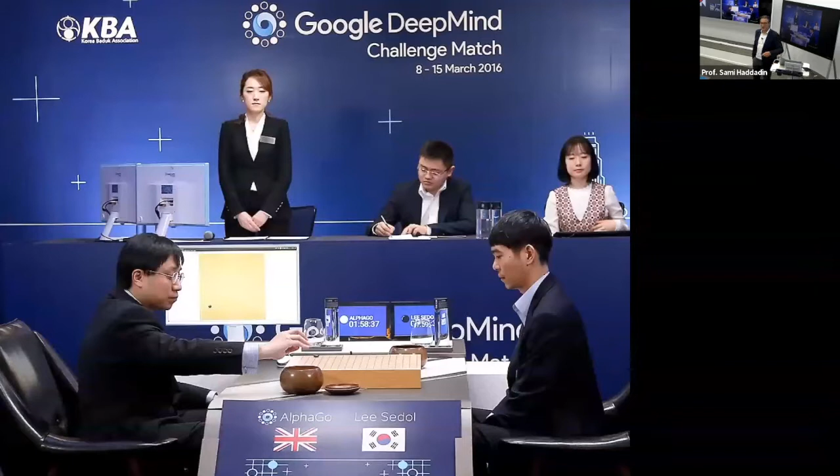And I think I would like to start with a little bit of an anecdote, because I think it kind of explains quite nicely where AI and robotics are kind of recently and what happened. And we all know that in the AI field, there have been kind of tremendous impacts. There have been very famous experiments. And many of you obviously know that Google's DeepMind system was beating Lee Sedol in 2016, in the game of Go.

So one could see that the computational efforts that were done were tremendous. That's one part, but also the result was outstanding. So in fact, the AI was beating Lee Sedol quite significantly. However, if you look at the system, and if you look at it from a not pure software-driven perspective, but from a robotics perspective, you ultimately need to ask yourself one question. Who the hell is the person on the left side?

If on the right side there is sitting Lee Sedol, and in the background the AI is telling the moves, then this - and we all agree this is not a robot yet - so this has to be a human. So the physical action of executing the AI commands in the real physical world still needed to be done by a human.

And interestingly, when this came out and I saw it as a roboticist, I thought, oh wait, this is actually something that I've seen many years ago when I was still in high school. So in high school, this was the big revolution. This was the other big AI revolution 20 years before, where IBM's Deep Blue beat Garry Kasparov, the world-famous chess player, nowadays more politician. And interestingly, the same question you could ask, except for the person sitting on the other side of the table. So on the right side, there is a person. He's one of the main developers of the system, but also the same question.

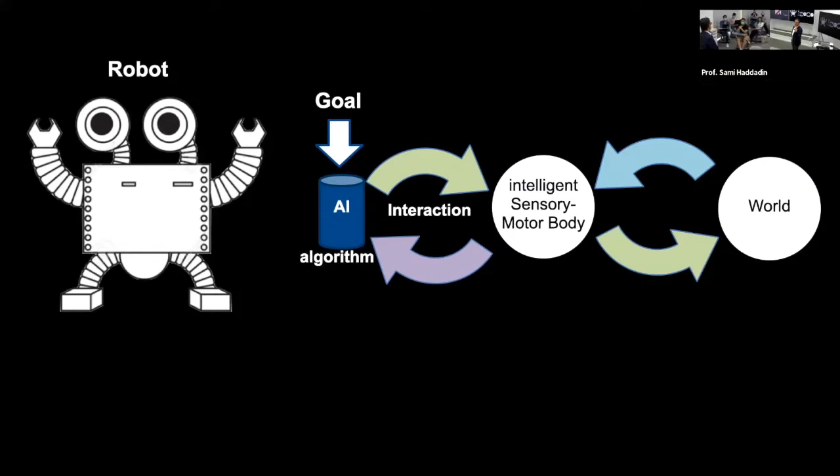It's not a choice. It's not like speech, where you can at least to some extent decouple the source and the sink. It's a systemic process, and this has to be reflected in robotics.

And then obviously the skills that we want to give the systems are not just in one domain—they are reflected in various dimensions, typically represented by the functionality, the goal, and the algorithm. And obviously we need to take care about the energy problem and the memory problem. We cannot have infinite resources. Let them be even quite substantial, but they still need to reflect the constraints of physics.

Meaning, if you want to have a mobile robot, if you want to move in the real world, if you want to have an autonomous car, we all know the energy problem is one of the most important ones. And it's not just the energy supply, but also the energy consumption of algorithms, as all of you are obviously aware of. And then the actual skills we typically care about in robotics are locomotion, manipulation, and interaction.

Manipulation and locomotion are also interaction problems in nature, but interaction with a human needs very distinct approaches. It's not the same as walking, where we interact with the ground or the environment, or manipulation, where we typically interact with passive objects that have physical properties. With humans, we interact with other agents, or robot-to-robot communication—another form of interaction.

So we have one big challenge in robotics all over the world: we are kind of doomed to be told that robots steal the workforce, that they steal jobs. That has been a prejudice for many, many years. And even if you talk about AI, all the magazine covers typically show robots that take the jobs—it's never a binary code or something, it's always this physical manifestation.

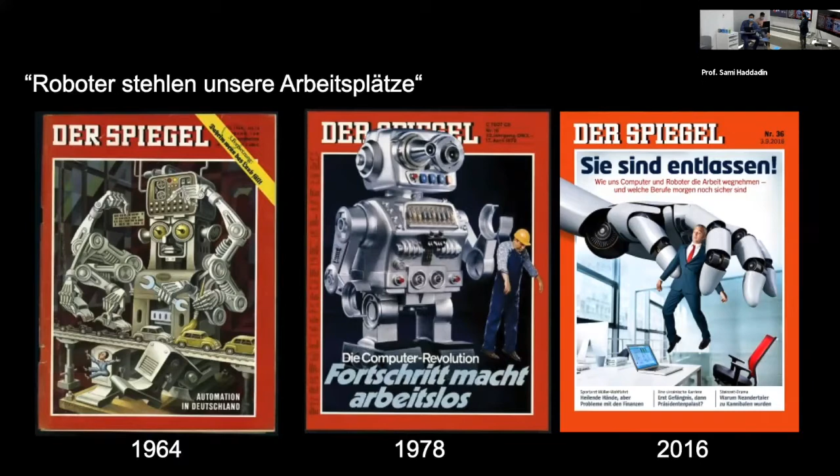This is, in Germany, a very famous newspaper—like our Newsweek, you could say—Der Spiegel. In '64, '78, and 2016, they always made this narrative that robots will steal the jobs. Implicitly, on the left side, it reads automation.

So the rise of automation after the war in Germany was obviously very important. And then the computer revolution in '78 - you think about it, retrospectively you're not really sure how to respond to these kinds of statements. And 2016: computers are taking away the jobs.

But interestingly, just about 4 weeks ago, there's another important newspaper in Germany - I know there's many of these in the world, I just showed them because Germany is very conservative. We need to think first, then we move, then we think more, then we move a bit more, and so on. We think everything through from the beginning, and only then, if we're 100% sure it makes sense, we start moving.

Why? Because we have labor shortage, high risk jobs, demographic change. These are all massive challenges that our societies are facing all over the globe. I think society is at least starting to understand that automation, robotics, intelligent smart machines that use AI algorithms are part of the answer.

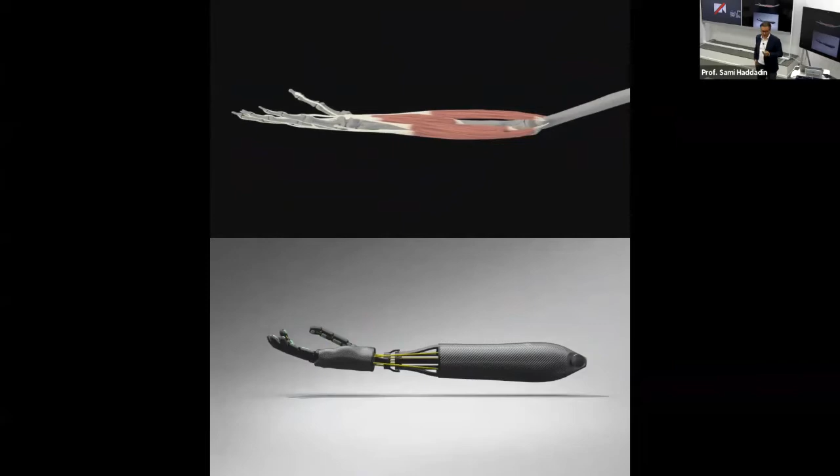Okay, then obviously one important aspect is the intelligence in the body. Sometimes we call this embodied intelligence, the emergence of what we know to be the homunculus, so the representation of the human brain regarding how much volume of my brain, of the cortex, is responsible for parts of the human functionalities. Obviously, the sense of touch, the manipulation, is by far the biggest ones.

And this is exactly what we have been bringing into robotics. So robots with an artificial nervous system, with an artificial sense of touch, and making sense out of interaction. So it seems that in human intelligence, the interaction with the world is one of the core things to understand before we can actually generate true intelligence, because it's something that has to be exploring the world, to interact with the world and make sense out of this world.

So this kind of relates to the picture I gave you on the systemic interactions between the sensory motor body, the AI algorithm behind, which is basically the central nervous system, you could call an artificial central nervous system, and then the interaction with the world. So, and then obviously the body schema. I was talking about this earlier.

That's something we all know from little kids, especially when infants, they start to do these motor babbling skills, right? So this comes basically for free. And this leads to a kind of an optimization process in our own body. And we have been reproducing these kind of things in AI fashion, you could say, that our robots are basically able to be switched on. They move around a little bit. They explore their own topology, generate that automatically, and it doesn't have to be done manually anymore.

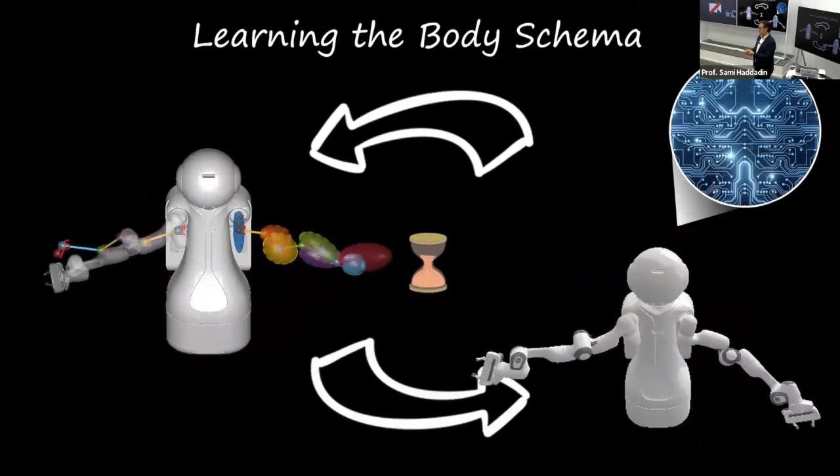So these kind of approaches give artificial embodied systems the ability to automatically generate intelligence on a, let's say, body level. And that would be the basis, because these things are really important. If you don't know what you are, where you are, how you interact with the world, it's very hard to do this purposefully. I would even argue it's impossible.

Then you start to get these locomotion skills. Interestingly, one of my students has parents that filmed all of his steps when he started walking. So they have all these kinds of motions, so we could study a little bit how he was doing. Seems to be normal, he's walking quite fine. And from this, obviously, come the principles of locomotion. This is the only thing I'm going to talk about locomotion today, but just so you know that this is obviously a very important aspect in robotics.

Locomotion is a highly dynamic process. Many of you know Boston Dynamics, right? So many of these things are in some form still pure control. They're understanding fundamentals of the body, but they're still missing the intelligence, the autonomy, the learning, and so on. But still, it's very hard to do these things without understanding physical principles. So that's an important aspect, that you fuse physical principles and learning principles together to really build physically embodied AI systems.

One of the key skills in humans, that's where we are today. That's my daughter when she was 4, trying to open a door, and I gave her 10 trials and she did it in 7. So that's kind of the key skills we have. We're not yet at the super complex thing. It took about 1 minute.

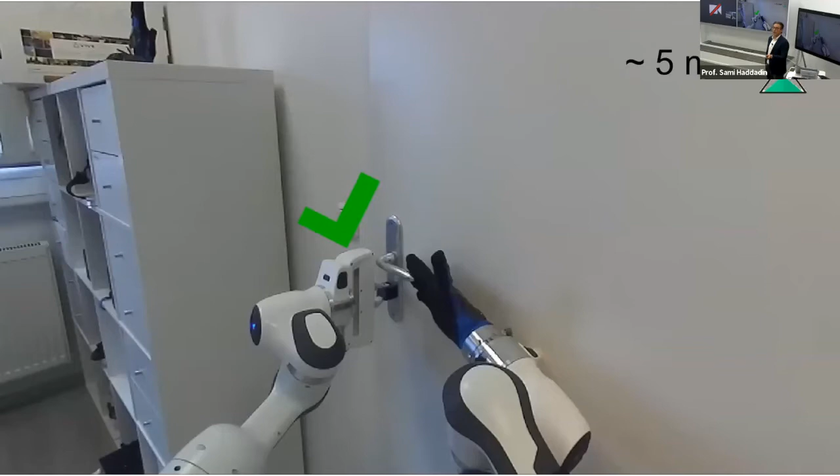Then obviously the fusion of various sensor modalities. We need to not only have proprioception, the notion of where am I, how do I interact, but the fusion with visual skills, auditory skills, and so on. Multimodality in reality is absolutely important. It's very interesting if you look at humans, how bad they perform if you reduce one of their senses for some time. They need to compensate, they need to learn. It's a fully new learning cycle that you implement there.

These kind of things are really important. How do you fuse visual and proprioceptive information, tactile perception, so visuotactile loops, such that you can really have human level performance, in particular in interacting with unknown environments that you have not seen before. This generalization is extremely important because we simply cannot generate all the data that has never been there. So robots need to learn in the loop, and therefore reinforcement learning is one of the preferred choices when you look at these systems.

But this is just a very recent advancement. So let's look at what happened in 2015. Let's take a step back. That's exactly what happened in 2015. I did an experiment with my daughter.

She was making a big mess in our living room, and I was wondering about the learning algorithm, so I told her: if you take this key and you can open the door in less than 10 trials, you don't have to clean up. So I set the reward, right? It's an interesting way to do experiments—I've got 3 kids, so I do all kinds of experiments with them. What was happening was that within 10 trials she was successful—it was 7, in fact. So I was wondering, maybe it's 1, maybe she will not be able to do it.

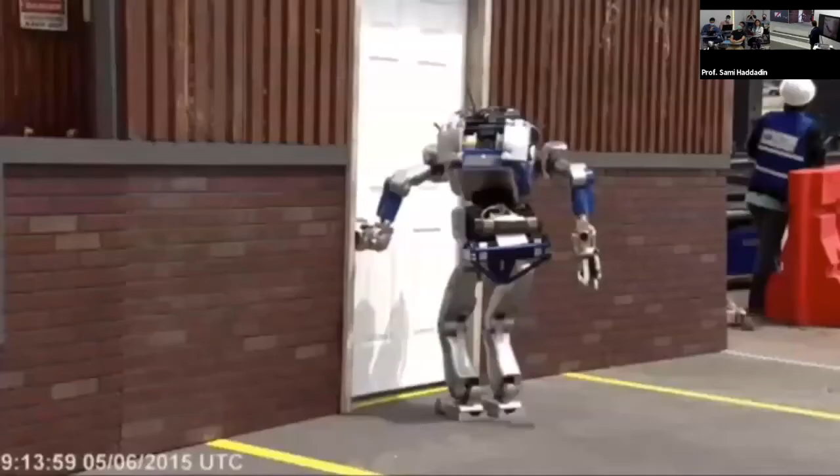This was the time where big data, machine learning, deep learning was really taking off, and in the robotics field that was not happening. Somehow it's kind of devastating, right? We were not there, not even close. The best groups in the world were competing in 2015 in the Robotics Challenge, and let's face it, we were not even close to where my 4-year-old kid was back then. Let alone the Garry Kasparov of key opening. So that's a very different challenge we had there.

All right, and then if you look at it, why is it so hard? Why was, for example, the advancement in mobility so much faster?

Autonomous driving seems to be there to some extent. Well, in fact, if you look at biological systems, mobility has been there very early. Every single cell organism is able to do navigation, to do mobility. Very simple, right? It seems to be evolutionary, one of the earliest concepts.

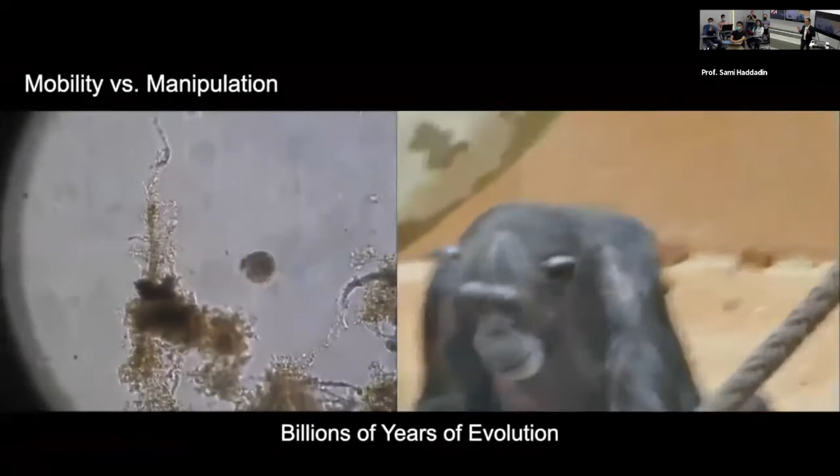But if you look at manipulation, primates are the ones that really could do it. This took billions of years of evolution, co-evolution of brain and body. So there seems to be something fundamentally more complex in manipulation and interaction in the physical world than purely navigating around it. So I think this is just an example that tries to understand that.

And interestingly, this has always been a question in robotics. Even if you go back to the early days of robotics, it started with very big positioning machines. That's the first industrial robot by Joe Engelberger and George Devol. That has actually been the first robot that industrially was able to be combined with a computer. It was the Puma 560, which is still the grandfather of every first generation industrial robot, the first computer controlled robot. A 6 degrees of freedom, 6-axis motion that could be controlled by a computer program. So this is kind of how things started.

But at the same time, essentially, the early days of tactility already took place. No one ever wanted to have just a motion robot. Everybody always wanted to have, I mean, Shaky was a mobile robot, but anyone else who did manipulation was questioning, was asking the question: can we interact with the world? Can we grasp the world? How do we introduce tactility? The sense of touch is the most important sense in physical reality to produce intelligence.

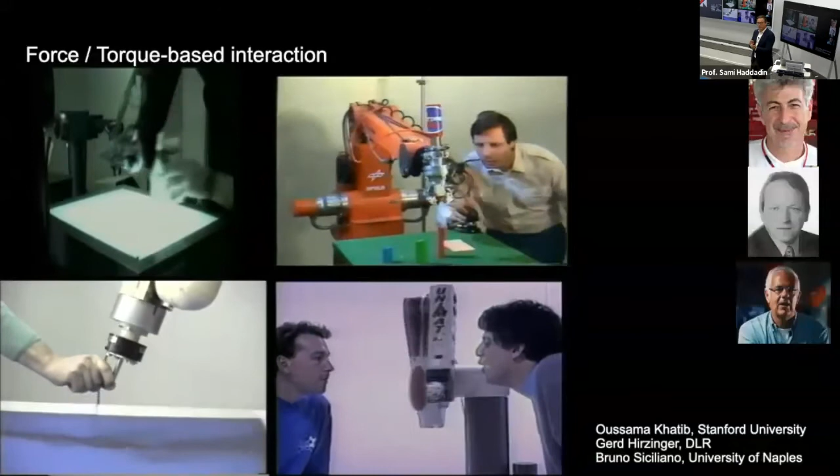So this was not new. In the early 80s, many famous people like Oussama Khatib or Gerd Hirzinger, Bruno Siciliano, and others were doing the very, very early basics. How can we make robots force sensitive? How can we make them reactive? For example, reactive planning based on computer vision. So this was always very early on already in robotics, but it never hit the reality. It was never punching through to translate into real industrial or real healthcare robots or anything like that. It was always in this laboratory environment.

So the industrial robotics generation has been the first one. As I said, the Puma 560 was the father of all the standard industrial robots, and you can have here hundreds and thousands of different systems. And then only maybe 15, 18 years ago, the first so-called cobots came into the world. Robots that could be operated with humans without safety fences. They had a kind of an emergency system, or still have, that if you touch them, then they stop. But it's really a very crude system still.

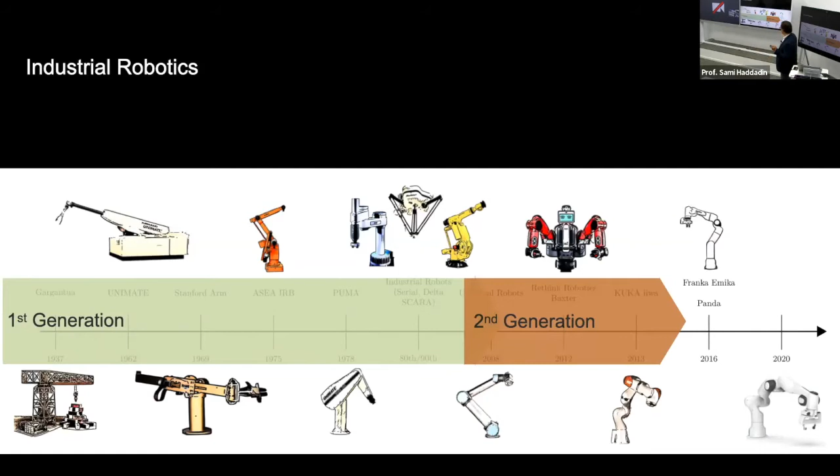And then only recently, for the first time, we have systems, and we were kind of at the core of this development and also translation to reality. So these systems are now industrially available. They are considered the 3rd generation of robots. Also made it to the cover of New York Times, National Geographic, and so on, which I think was nice to appreciate these big breakthroughs, the first robots with a true tactile sense of touch in reality - not only in my lab. And to be honest, it took 15, 18 years of basic research and many people before to do some of the basics, and now we are there that these kind of things can actually be realized.

So, obviously there have been many key influences, and many of them really go back to probably many of the names like Raibert or Khatib or Paul, Hirzinger, Atkeson, Hollerbach. So many of the people also in AI were doing tremendous impact, were originally trying to solve these problems. In the early 80s, actually some of the concepts were proposed in '78 or '79. So this has been always a dream of robotics to have robots in the real world, but we were just technologically not there.

And then there has been lots of work on what we call collision handling. How do you interact with robots? How do you give them reflexes? How do you make robots with flexible elements? We are all flexible, right? There's so much intelligence in the human body just due to our flexibility and compliance. So how do we make use of that?

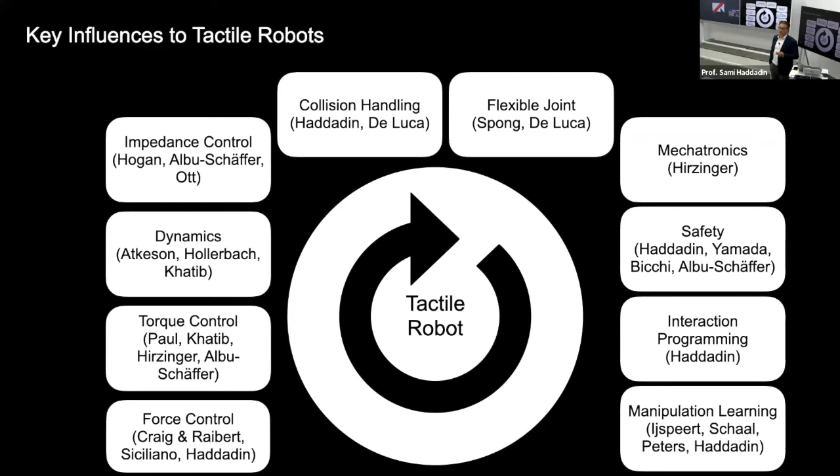And then obviously all the great works that came into manipulation learning from Ijspeert, from Peters, Schaal, and others who have been really seminal in the way that they introduced various concepts into robotics. So these kind of systems became now reality.

Just to give you one example, very anecdotic, but what's the difference? So that's a standard positioning robot, obviously very dangerous, none of you want to be around it. If you look at the collision system of a collaborative robot, it doesn't really have a sense of touch. It's more like a car that runs into something and doesn't kill it, so it's still very brutal in some sense.

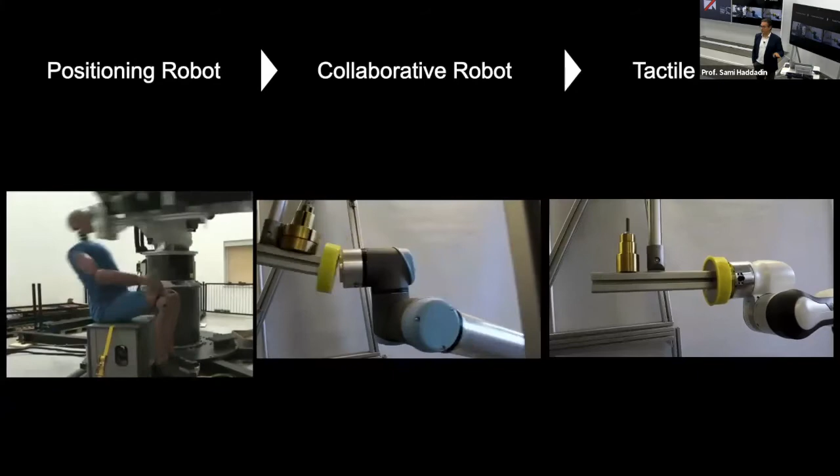And then comes this final generation, really with proprioception and the sense of touch and a reflex system similar to humans. By the way, the reflexes you need to touch the hot plate and retract are about 60 milliseconds, just the reflex. These systems are now at a millisecond, so 60 times faster than a human. So that's true superhuman skills that finally could be reached.

And how is this possible? How do we get to this tactile performance, and then how do we exploit it in algorithms? Because this will open up all the things like in deep learning, the difference between GPUs and CPUs, and the ideas of essentially new algorithms that enable that.

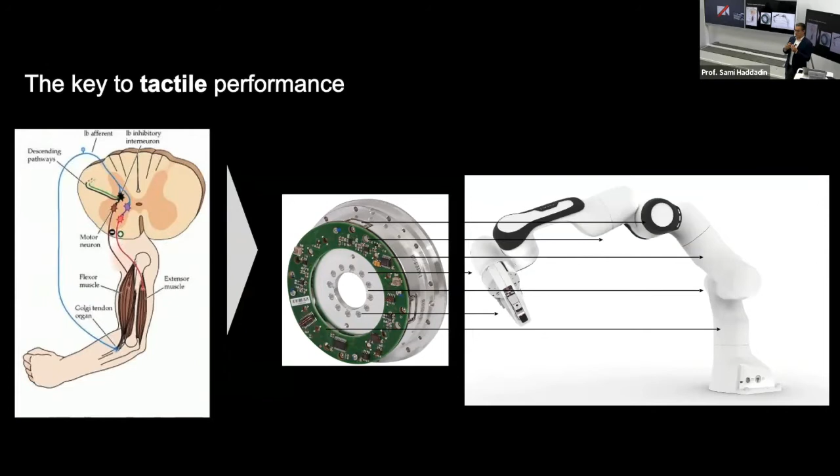So the tactile performance comes from mimicking what we have in the muscle systems. We have the Golgi tendon organ, which is essentially a force sensing device, so we are able to measure our internal forces. That's built in all of you. This is basically what we copy with technology, and then put a lot of control and learning algorithms on top. And with this single sensor, like when you have a computer vision sensor, point clouds enabled everything in perception.

So these two kind of analogies are drawn: GPUs and point cloud sensors. So we have now sensing and the right hardware. So dynamics models, interaction control, reflexes, machine learning for manipulation, and tactile programming became possible.

So what do you get? You have robots that weigh 17 kilograms, and with intelligent algorithms that are aware of their own embodiment, you can take these robots by the hand like a little kid. So now you can show them stuff very easily, very gently. This is the true first robots that are tactile in nature.

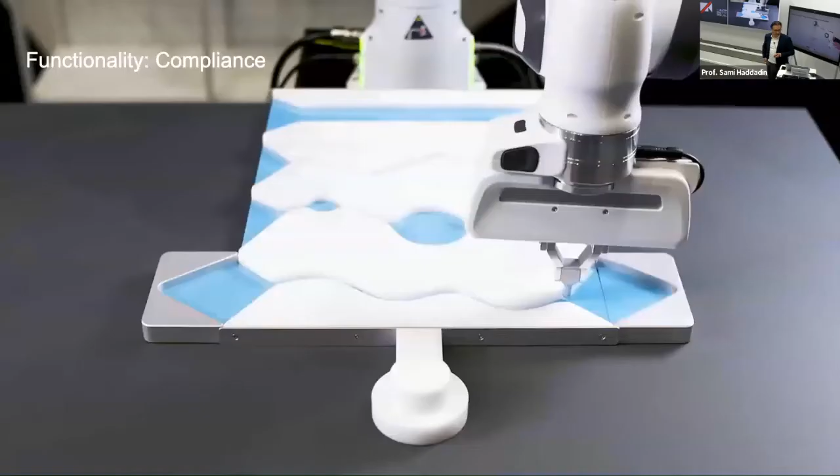And they are compliant, so they basically have artificial muscles all implemented in software. These robots don't know what curvature is there, and they just give in because of their compliance. It's active compliance, really kind of an artificial muscle system.

And you can actually change the environment online, and the robot still is able to follow without any algorithms that need to plan. So it's pure built-in intelligence, similar to what we humans do. We can follow curves and lines very naively, very intuitively, because we are built like that. It's kind of built into the system.

So it's in robustness and intelligence that gives us the ability to respond to the uncertainties of reality. This is a fundamental principle that is built into any biological system that has to interact in the real world.

And then safety reflexes. So a robot that can fulfill Asimov's famous law of not hurting humans, that's how you do it - that's a nail. The robot is blind, it's pure tactile, and it contacts the balloon and responds so quickly that it is not destroying the balloon. That's, I think, the safety system that you want.

Why don't we have autonomous cars yet everywhere on the street? Because safety is still the main problem. But if you want to go to reality, you have to make sure that humans are not hurt. So this should be our main priority in AI systems in general: do not hurt, do not harm, a little bit like the oath that medical doctors take.

And obviously what is really important is intelligence on the levels that you don't see. They're so fast, in milliseconds, that you want to detect collisions, contacts with environment, which is the manipulation problem, from the early phases: to detect, to classify - detect the contact, where is it, what kind of signature does it have, what's the purpose of the contact, is it a collision, is it a potentially harmful contact, am I manipulating the environment, am I handshaking - and then reacting to it. This is a very fundamental aspect. And if you want to be able to do that, you need to be able to fundamentally detect contacts in arbitrary environments.

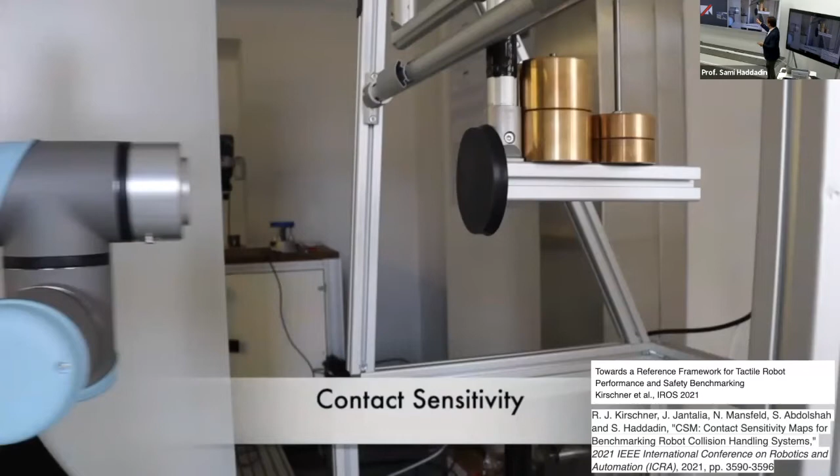This is an experiment showing that a step change in robotics has taken place. Collaborative level systems are essentially not able to detect contact with, I don't know, maybe 10 kilograms. I think none of you have this kind of low sensitivity, so all of you can detect very light contacts, right?

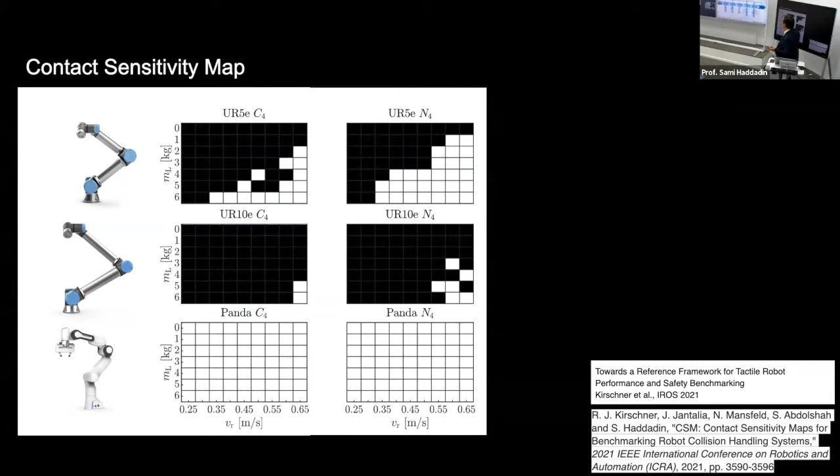All right, and what can we do with that? There's so much we can do with it. Obviously, we can now respond to an environment, we can respond to humans, so we can actually show different reaction strategies. Robots can now do all kinds of things, and they move in proximity to humans. You can basically talk to them via haptic interfacing.

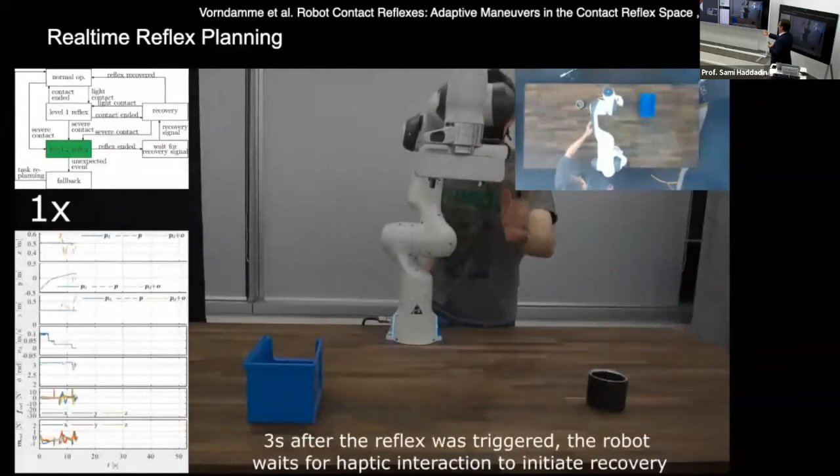Depending on how you touch them, they speak a different language, so they go faster or slower. You can show that reflex, they go back into the task. They do all this autonomous planning, just in milliseconds, because they know essentially what the task is. The task is to get that cup here. And if you see the collision during the phase where the cup was not in the gripper, the robot was compliant along all axes.

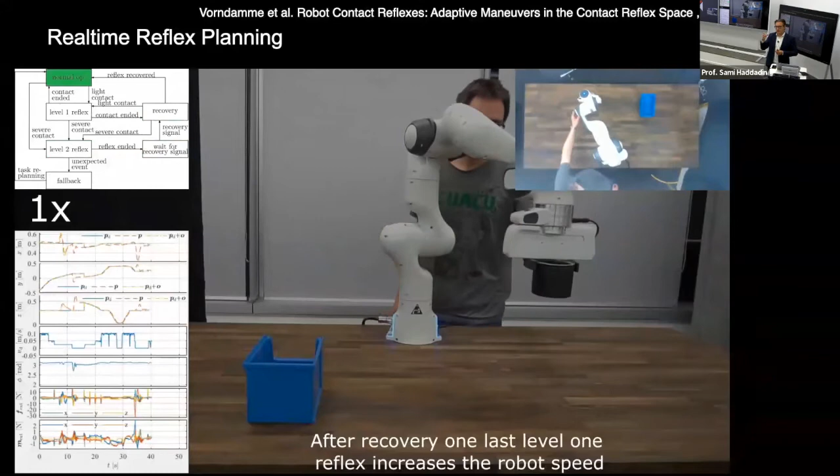Now it's obviously aware of the object it's carrying, so if you take it away out of the task, it holds the cup. Imagine it's not spilling water, right? So the idea is that this intelligence in the system, this embodiment, has to be in the AI of the system, and it needs to understand what the task is and be able to respond to that. These kind of low-level reflexes are actually on a level that humans cannot do. We are basically trained over a long time, but we cannot plan, let alone have them be dictated by AI algorithms or by intelligence itself.

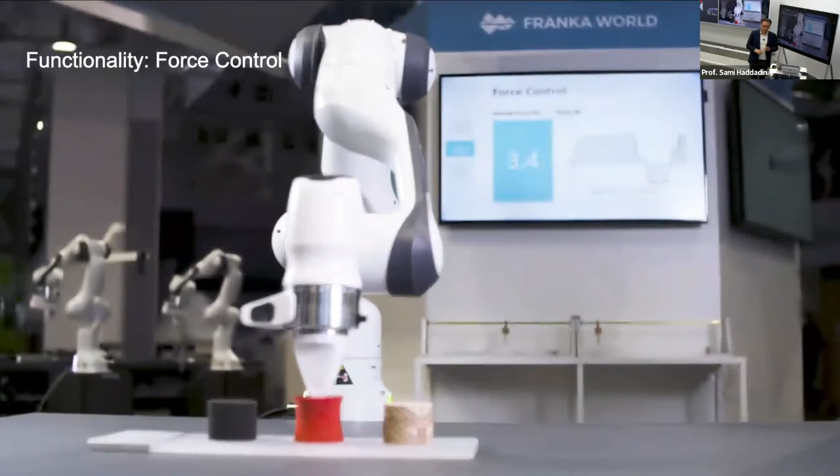And then obviously we need to control the world, we need to be able to control forces. So if I tell the robot 7.8 newtons, regardless of the interaction, this is a very principled experiment. Whether it's foam, whether it's rubber, or whether it's wood, it has to be 7.8 newtons. This is something that, by the way, you guys cannot do. No human is able to exactly control that force.

It's actually something that now makes these machines safer than humans can ever be, which I think is an important aspect. So with these robots, you can actually have tactility and interaction abilities that, with the right algorithms, can now be safer than anything we've done with humans. This is our GPU, you could say, in robotics, right? So now we finally have robots that have this tactility, that have these interfaces, and you can now do robots that can do things that for you are very simple.

But if you look at the reality, no robot has ever polished a car. No one has ever done the famous trick from Karate Kid. So these kind of things can now be done. By the way, the robot has no idea it's a jigsaw, it does not know that there is this impact, so it just tries to polish.

With these disturbances in the environment, that's basically the robustness of these algorithms you get. They can actually deal with totally unknown aspects of the environment. The robot does not know how long this object is. Just by feeling and low-level AI planning, it's able to respond to these kind of unforeseen environments in millisecond decisions. On the left side, you see the table is basically moved by a human all the time, and the robot is replanning on the spot, while very accurately applying force to the environment.

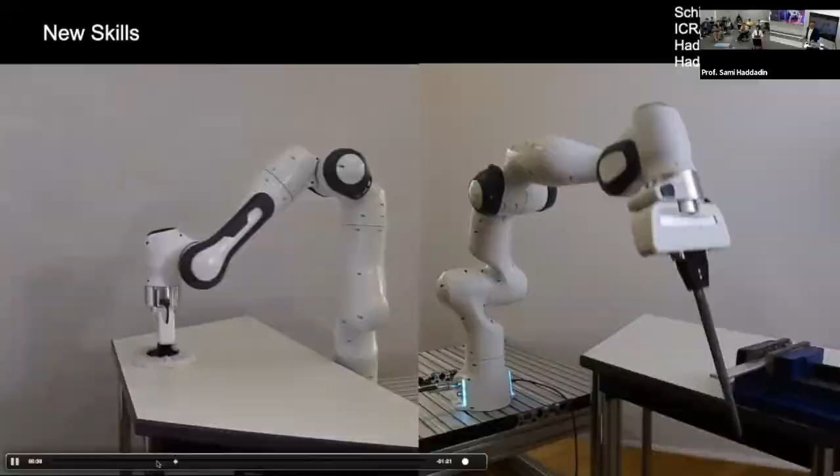So this is really now where we are, basically, standard. What is this good for? It's, for example, good to draw Elon Musk from the distance. That's something the robot here has its sense of touch. The artist on that side sits and uses that robot as an avatar, right?

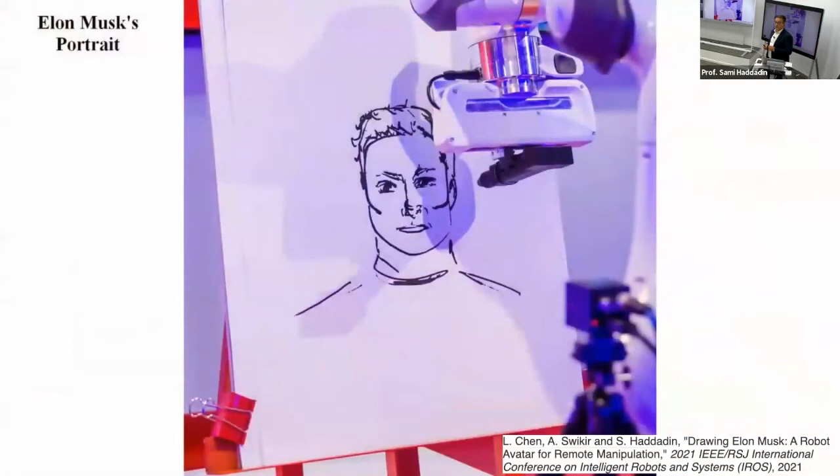It sees only that visual representation, and the robot is basically the prolonged arm, but obviously via a distance. So the robot is basically managing all the low-level things to, in the end, have such accurate drawings without being on site, without being physically connected.

So it's really kind of this intelligence, low-level intelligence, tactility, and control that gives you that kind of authority on remote interaction, which obviously in the pandemic would have been great to have everywhere available, right? I mean, think about telemedical applications, for example.

Okay, so what can you do with it? Well, you can now automate all the things that could not be automated. So you can automate electronics. Electronics is basically done manually still today. If you think about our wonderful digital devices, they are done in massive manual labor all over the world, right? This is something that is not automated. Millions of people do very, very uncool jobs to essentially manufacture these devices. And in particular, why is this the case? Well, because you know how easy it is to break the glass of an iPhone or other smartphones. So this kind of automation is now finally possible.

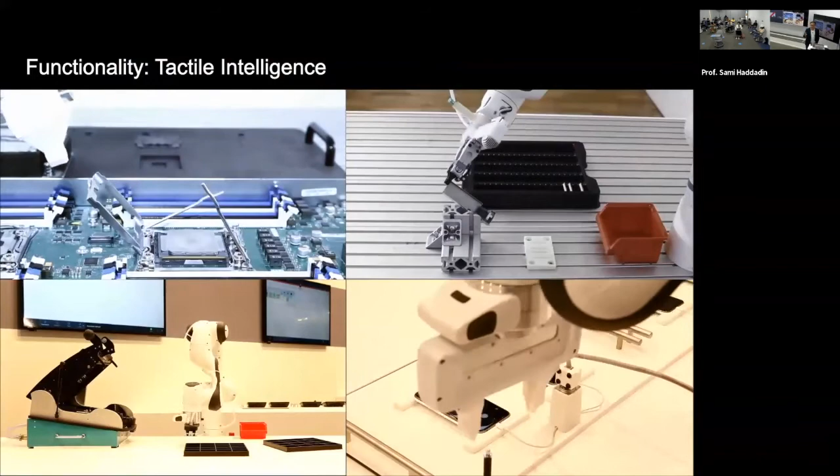And what is kind of interesting, so I also founded a company called Franka Emika. It's Germany's robot manufacturer nowadays. And these systems have now basically been deployed anywhere in the world. Every big company, every lab in the world that does manipulation research, or most of them, are actually using that system, including NVIDIA in the Omniverse. You see it being used in Intrinsic. So these kind of systems are now enabling all the machine learning communities in the world in robotics.

So this is really now the hardware we needed. And I think what is really great, it's not only in research, but also all the technology drivers in the world are now understanding this. If you look at ICRA, which is the biggest robotics conference in the world, out of maybe 120, 130 manipulation research papers, 100 of them now use that robot. So it became the de facto standard in the world to basically do your manipulation and manipulation learning research.

So, same thing, just as a final conclusion to that part of the talk. This is now where we are in terms of systems, and then I'm going to talk about how we use that in all kinds of new types of learning applications.

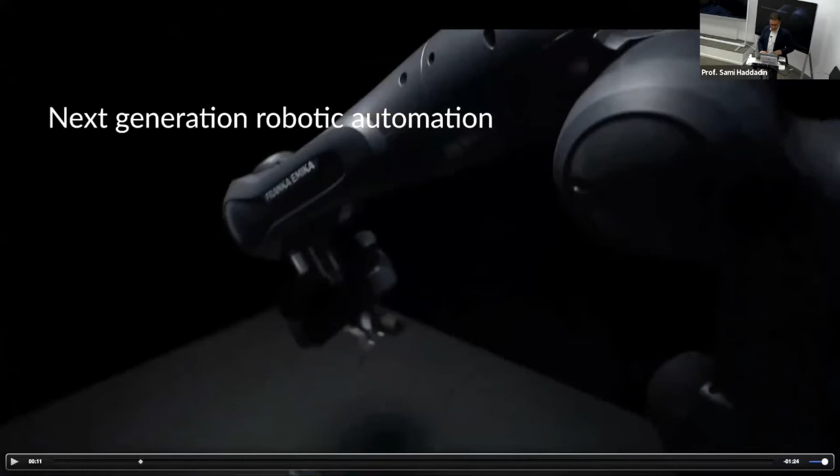And what I'll show you now is a video. There's unfortunately no sound. Do we have sound, by the way? No, there's no sound. Oh wait, no, it's me. Sorry, I think I switched it on and off earlier.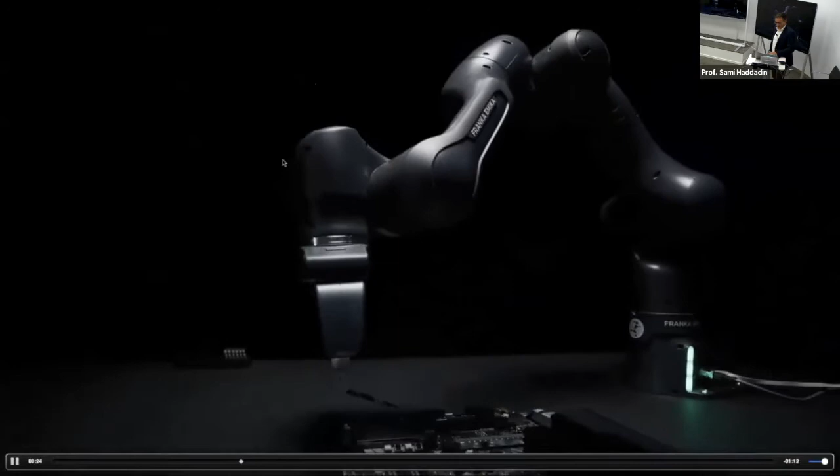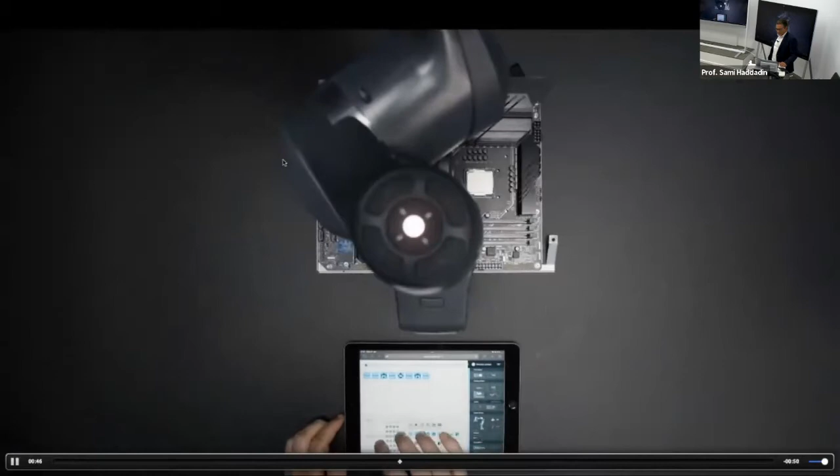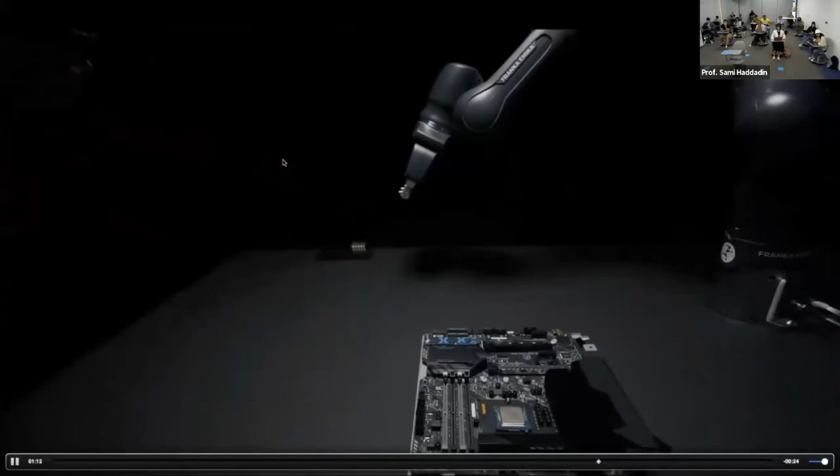Franka Emika pioneered robotics with a human sense of touch and is committed to creating a robotics platform to revolutionize industrial production. Now, introducing Franka Production 3, the robotic automation tool for everyone. In-house designed, industry-leading torque sensors in all 7 axes allow for a large range of motion and poses. Intuitive user interface allows anyone to start using Franka Production 3 in minutes. Just plug and use. Designed to be intuitive, smooth, effortless hand guiding for precise and easy positioning. Compliant with industrial robot safety requirements. With Franka Production 3, we are enabling industrial automation that allows production of anything, even a movie. Franka Production 3, dedicated to the new generation of industry players. Think it, make it.

Okay, so basically this has now become reality, which I think is great, that this becomes available to people. And now I'm going to show you how this can be used for all kinds of machine learning research. So it's kind of our GPU in robotics, right? I've said this now already several times.

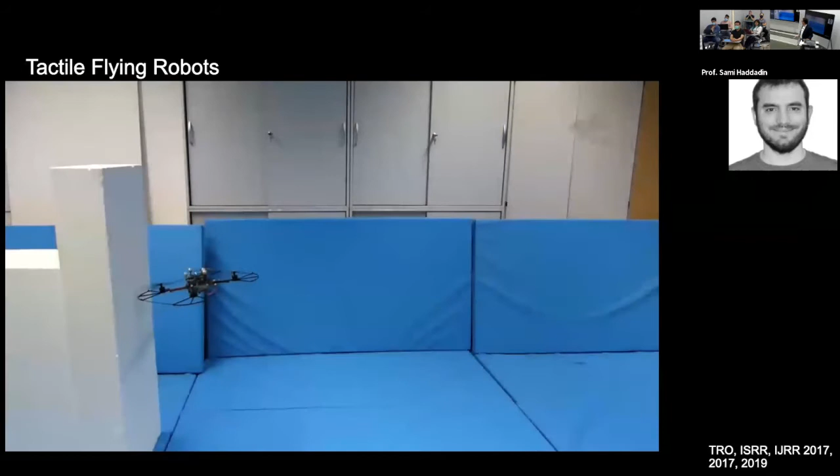So it's really important to understand that hardware accelerates software. I always wanted to do lots of things in manipulation learning, but somehow there was no platform yet, so we basically needed to create it. And that's kind of now the solution. Interestingly, just as a side note, this is not only enabling manipulators, but also, if you look at it, Theo was actually my first PhD student many years ago. So what Theo has been doing in his time was, okay, let's crash a drone—can we enable drones also to do the same thing as we just saw?

Okay, so drones with a sense of touch. Why? Because this gives drones the ability to fly around, and if they are autonomous and fly in the woods or whatever, they don't crash into stuff and stop—they just bump into it and can continue.

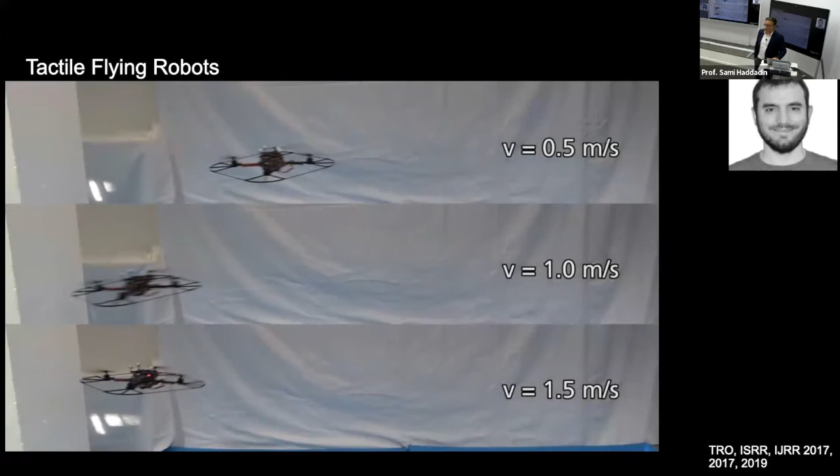This has been commercialized as well with, maybe some of you know it, Skydio, a US-based company. You can use it not only for bumping into stuff, but also for landing and taking off during very strong winds. What you see here is the drone autonomously estimating the wind at the moment based on these senses of touch, and is able to autonomously land despite this heavy wind.

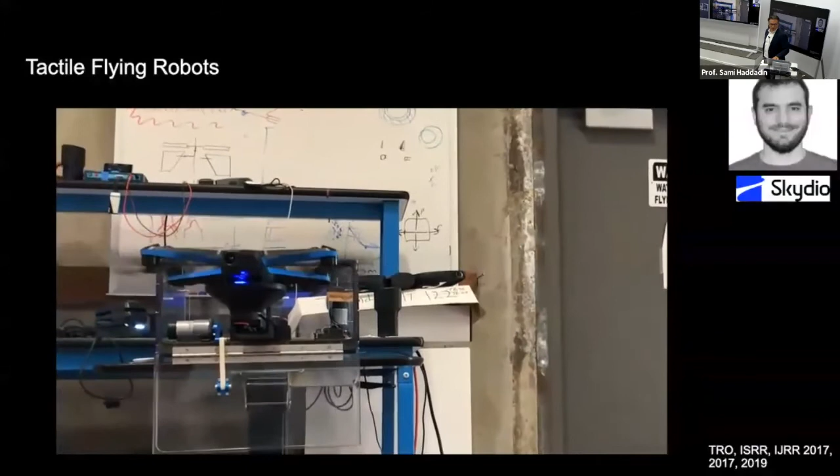Not only for drones, but now also for mobile systems. Mobile systems typically have bumpers, but they don't have a sense of touch. If you think about autonomous cars, I told you they may crash into stuff, so you try to minimize the danger. But what happens if cars, autonomous robots, essentially have a sense of touch?

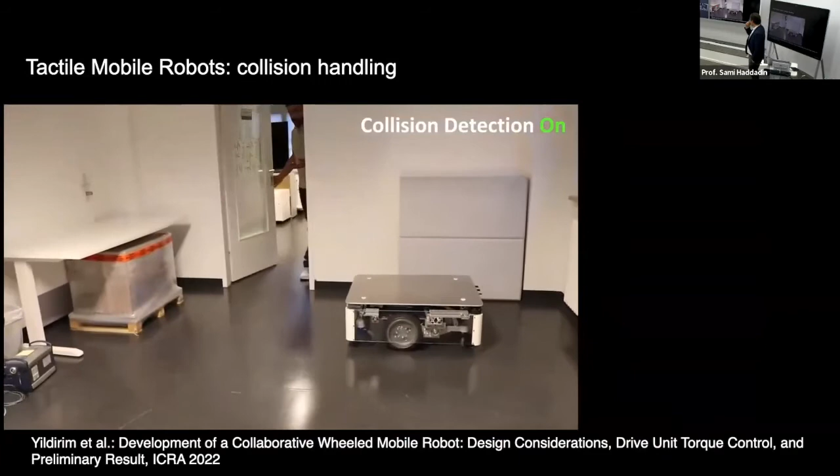So basically the same thing, the sense of touch in the drivetrain—we just published this at ICRA—is able to very sensitively detect the contact. This is a 100-kilogram platform that has the sensitivity of, I don't know, of your hand basically.

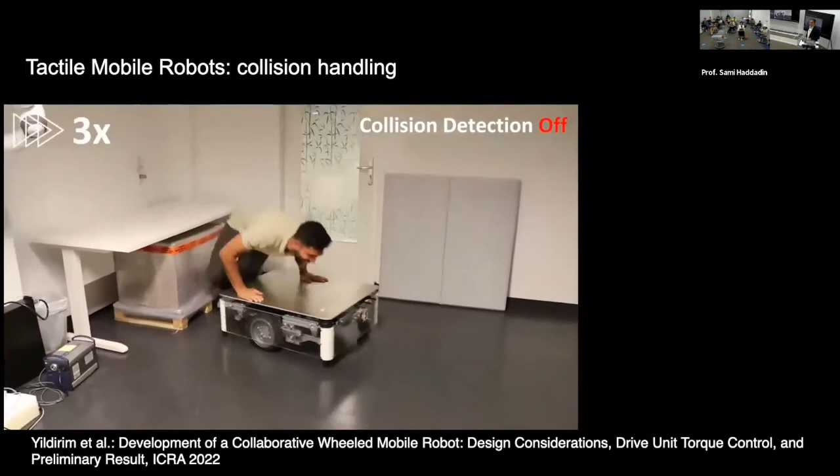You can obviously switch it off, right? So it's a software thing. But it's always nice to tease the developers with this. I think it's clear that this kind of technology is very, very crucial. If you want robots in the homes, robots in the healthcare sector, how do you want to do this if you cannot do safe interaction with the world?

That's absolutely crucial. And then last but not least, we actually solved this problem, I think, for general robots. This is multiple contacts, slow-mo, and the robots are able to detect, isolate, and estimate all these contacts at the same time. We can do this for fully-fledged humanoids, even at millisecond, faster-than-millisecond ranges. So now you have basically extremely fast, beyond human capabilities, to detect and react to collisions in principle.

One thing that now has to come as the next breakthrough is obviously interaction via tactile skins. That's something that is still not yet there as you would like to have it. So there needs to be something done.

Interestingly, this can not only be done for robots, but also for prosthetics. So other things we're doing at the moment is to generalize these things to hybrid systems, to symbiotic systems that basically share human interaction—essentially prostheses that have a sense of the embodiment, a sense of touch, and a sense of awareness of the body picture. This obviously relates very much to what we call nowadays digital twins.

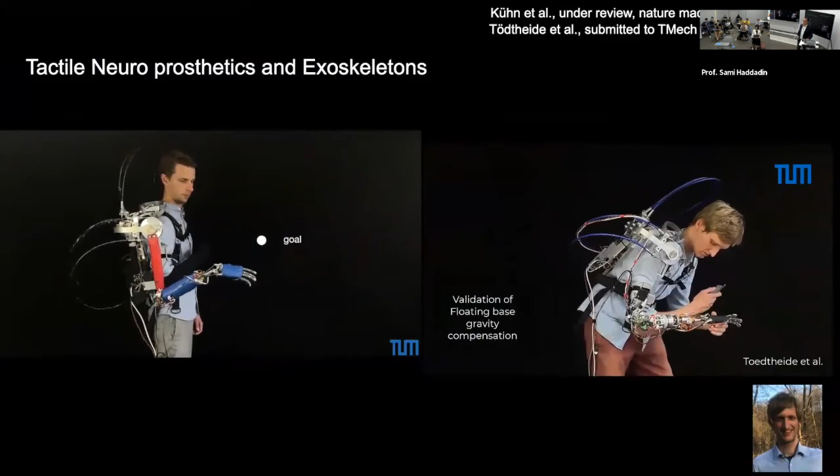Just to show you one example, that's the last thing on the embodiment part. So you see that the systems we build, despite being floating base, don't know—actually they know—that they are connected to the human, and they estimate based on available sensor information the state of the human, in order to be a perfect substitute for the, in principle, gone capabilities. These kinds of ideas are essentially such that any kind of system now—prosthetics, flying—we do it now for underwater systems even.

So can we make them aware of interaction, aware of their embodiment and interaction with the world? This kind of basic body awareness is fundamental to any really intelligent system.

All right, now let's come to the actual learning. So with these kinds of embodiments, can we replicate what my daughter was doing back then in the 7th trial? What you see now is basically the 7th trial when she was successful—a very interesting way of grasping things, but this obviously gets improved.

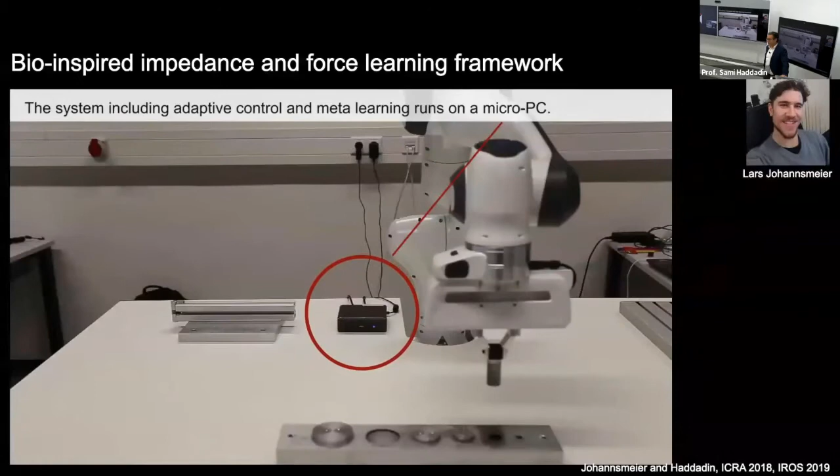We've been doing this for many years now with colleagues also from Imperial College—Etienne Burdet—trying to fuse human-inspired motor control and machine learning approaches in very efficient, very small packages with robots that can do these very hard manipulation tasks, not in days and with huge computing resources, but just on a standard PC and just in a matter of minutes.

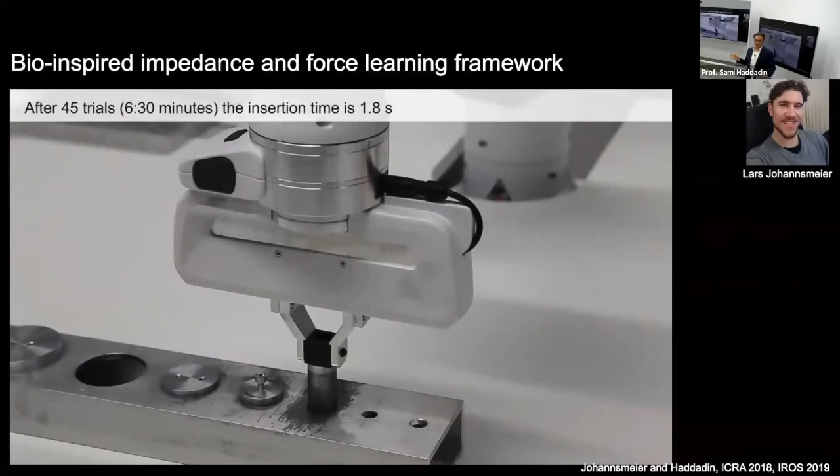So the idea is essentially to bridge the data lag problem with smart, let's say, reinforcement-based learning approaches that build on a control stack that is highly human-inspired. With this, in just a matter of 6 minutes, you can learn something that kids need 4 years and the 7 trials I was talking about before. So this is kind of the speed-up we have gained. And interestingly, if you compare that to standard deep RL methods, which are end-to-end, I will show you the results.

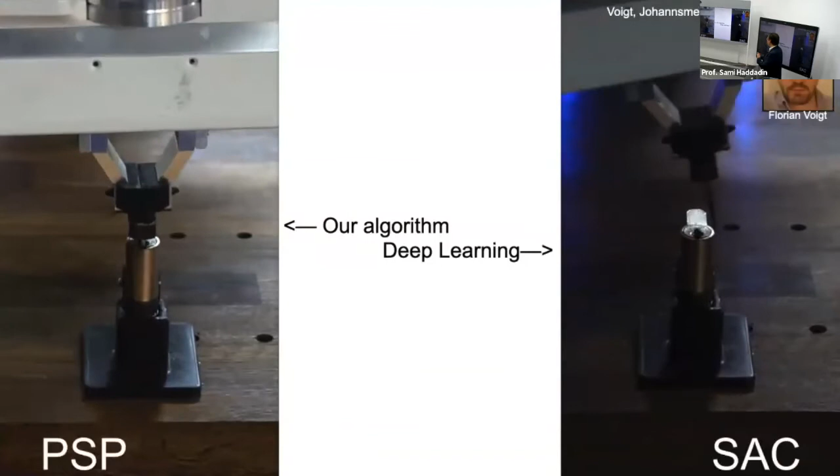In contrast to human-inspired architecture with a learning loop built on top, you can actually see for yourself the result. On the left side is something we published maybe two years ago, our algorithm, and on the right side is really uninformed end-to-end learning. It's essentially impossible to solve these highly complex manipulation problems without any physical or prior knowledge in the sense of intelligence, because it becomes intractable. We did our best for weeks to find a solution, but standard end-to-end was not able. With model-informed machine learning approaches, you can bridge that gap and achieve the breakthrough of robots solving manipulation and insertion problems in reasonable time with small packages of compute.

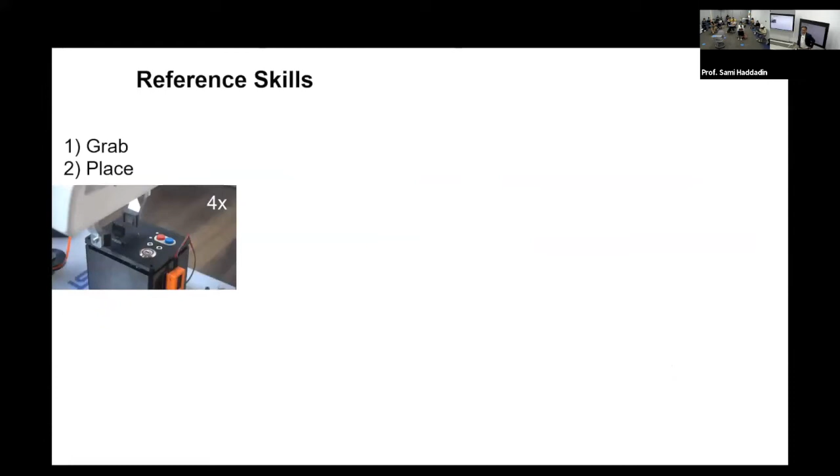If you do that, you can reach a level comparable to a human. What we did, which I think will be published at IROS, is compare this to a human expert programming the same thing - he's using the robot, programming it, and on the left side is the AI. Obviously the human expert is much faster at programming the system, and learning took a little more time. But what's interesting, beyond it being an expert, is the outcome: the execution speed of the learned skills - pushing buttons, inserting, and so on - is exactly the same. So the performance of the expert programmer is equal to the output of the robot learning algorithm, which I think is kind of remarkable.

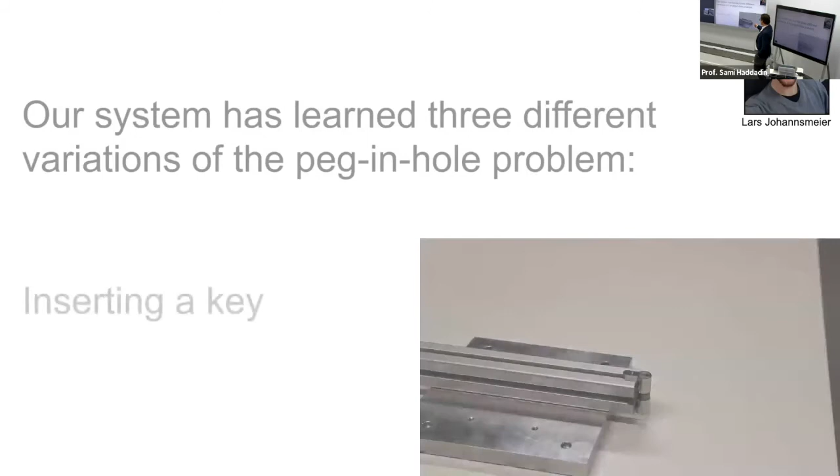The interesting thing is it can learn not just one task, but many tasks - so generalization and incremental learning is possible. We can now insert a puzzle piece or a key. These are the three things we want to show - very different tasks, not similar at all, including peg into the hole. Geometrically they're different, contact mechanics is different, compliance is different, accuracy is different.

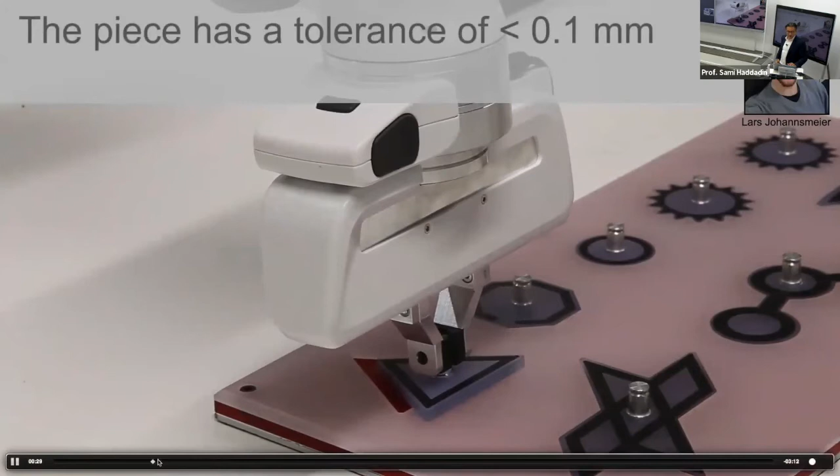And now the first trial of learning the puzzle, you can see here, that's a very, very tight puzzle. It's actually very hard also for humans to do it. And the interesting thing is, I just do it a bit faster. So now the learning is taking place.

Interestingly, we can see that the same learning algorithm with the same parameters is learning all of these tasks at the same time. So interestingly, if you use something from the other ones, it's starting to get faster. So there seems to be a transfer between tasks possible. We didn't expect that, so that's more an observation.

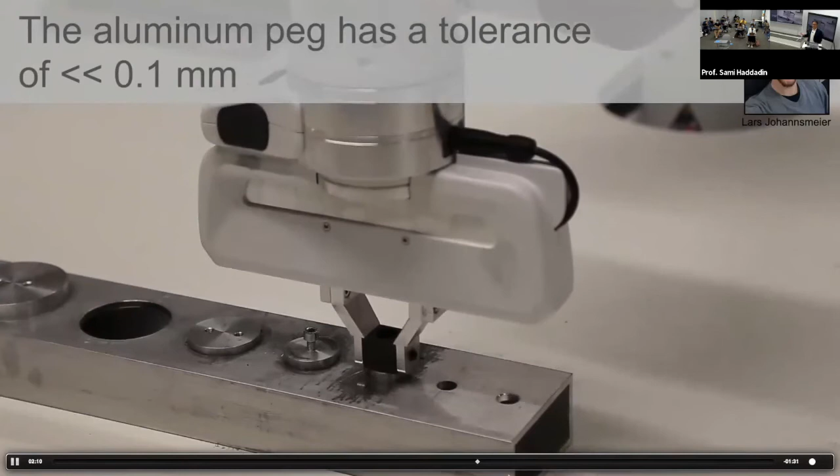So the learning algorithm seems to be now transferring knowledge from one task to the other one that is totally unrelated, you could say, except for it is an insertion task. But insertion is a pretty big word for basically everything we do in putting stuff into another thing. So that's a pretty big step we did there, and it took, as I told you already, 6 minutes 30 for each one of them, and the result now human level performance.

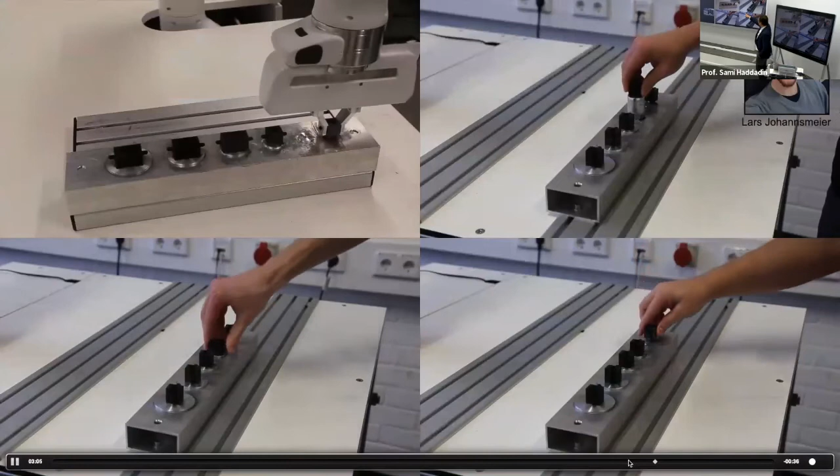So what you see is on the upper left a blind robot just with tactile intelligence, and then that's a mechanical engineer, electrical engineer, and computer scientist. I have to admit, interestingly, the mechanical engineer is the fastest. Kind of an interesting observation in that experiment.

But what is more interesting, I think, is that the robot is actually in the end, and you can see how it's jamming. It's really hard. I did it many times, and I was never as fast as these three. So, interestingly, the robot is in the end the fastest.

Okay, so we are now at human level performance regarding these examples. The next question that I was teasing already is, if we learn one thing, can we transfer it to another skill? Can the robot leverage knowledge it has been acquiring before and generalize so it can even learn faster? Not 6 minutes or half an hour, but maybe it's possible in 1 minute, maybe even faster.

Yeah, and the result, so we kind of classified, this is something currently under submission. We kind of classified tasks into distances, right? So classes of similarity, you could say. So we call these transfers interclass, interskill class, interskill subclass, interskill instance transfer, and so on and so forth. So depending on how close these problems are to each other.

So different keys, they are basically an interskill instance, okay? Or a skill instance if you do the same key at different locations, and so on and so forth. So we need to kind of understand how far are skills from each other, okay? It's a very rough taxonomy that just tries to a priori understand what's going on there.

Okay, and what we see here is just in a nutshell, we can see that depending on the distance of transfer that I just explained to you, you can actually see that the reusing of knowledge, so the speed up, for example, for level 1 transfer is 40%. For level 0 transfer, it's 80%. So yes, you can reuse knowledge entirely. Which means this effect is objectively there.

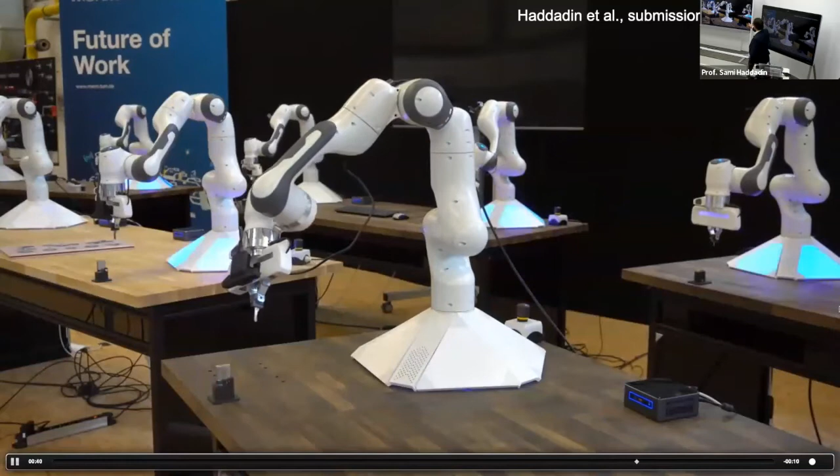Okay, so what you see now is that if we activate, these robots, by the way, have all cameras, as you see, just because we wanted to change the pose. So everything is changed. It's never the same experiment. All of them are different. So it's not depending on the pose. Everything is kind of changing, and they all have different keys. So this is kind of a lock, and you have door keys, you have indoor keys, and so on and so forth. They're all different.

Interestingly, if you look at the digital twin inside, that's the representation of the AI that collects the knowledge. They are, by the way, all distributed. It's not that there is one central AI. They all have these small PCs, and they just send around their learned parameters in a distributed manner, so that's actually fully scalable.

What happens here is you see the green ones are the successful trials, the red ones are the missed trials, and actually the red ones at some point saturate, so they don't go further. At some point, maximum robustness and maximum success could be achieved.

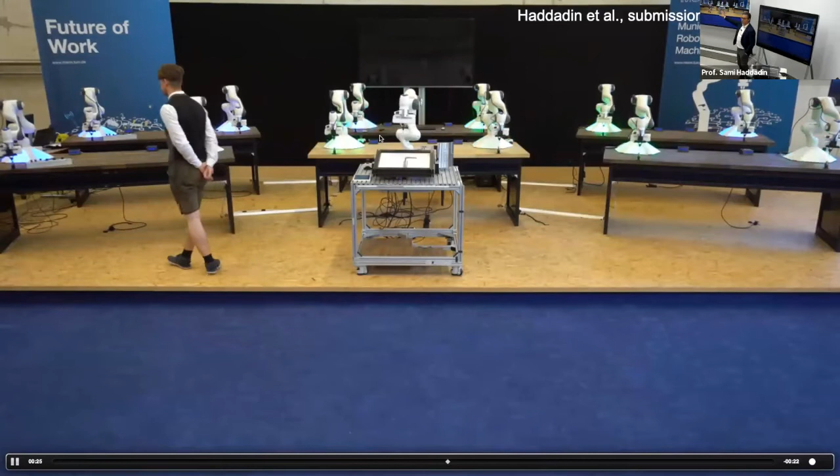This is now what happens in reality, actually real time what you see. The robots, the first one is always negative to begin, then they start immediately to essentially be able to do what they're supposed to do. So very early on, in the second or latest third trial, there's some stochasticity in that process—sometimes it's up to five, but this is very seldom. Very quickly they start to run through the whole network, a kind of an avalanche effect, so they're all able to do their insertion tasks.

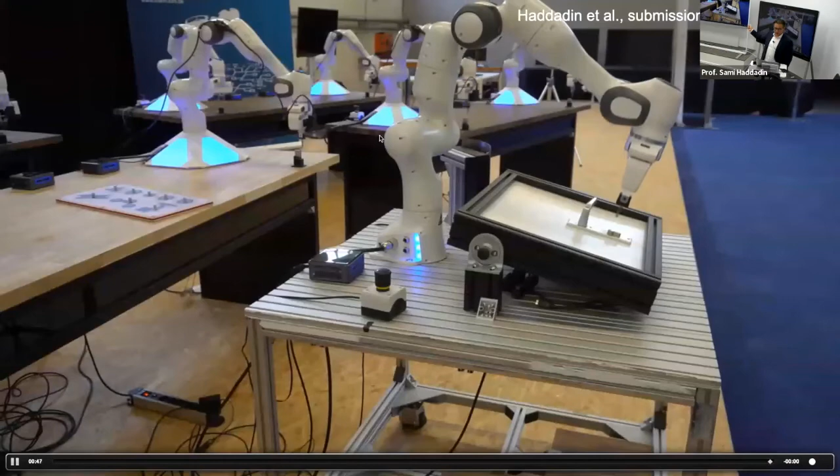And then in the end, we just took, what was this, 20 seconds? And now we put it to the front and you see everything is different—and again, the key goes directly into the hole. That's basically with none of these robots ever having had the key in front, in their hand. So here you can see the acceleration effect, just for one example.

All right, so this is kind of the theory behind it. I will not go into details, but basically, to sum it up, with standard deep learning this is not possible so far, I've not seen it—end-to-end, right? So it's not that deep learning is the problem, it's the end-to-end that is the problem. You need to carefully understand where the end-to-end is taking place. It's not at the torque level, it's at a different level. So if you do that and learn it from scratch, you always need as much time as you need.

If you can learn from experience, so incremental learning, you have the first qualitative increase in speed. And then if you go to collective learning, you get a second learning curve, and this is two exponentials that you see.

All right, so we have come far, I think. It's pretty nice what you can do, but still there's something fundamental missing, I would argue. We have significant problems in acceleration. What I'm trying to say is hardware matters, and we cannot always wait 30 years for new hardware—this is ridiculous. We need to work on the synthesis cycles of hardware to get the same accelerations with the next generation of hardware. This synthesis cycle, the co-evolution of software and hardware, I think has been instrumental in deep learning, and robotics is for the first time also there. So we need to work on that—I think it's clear that we cannot decouple these problems.

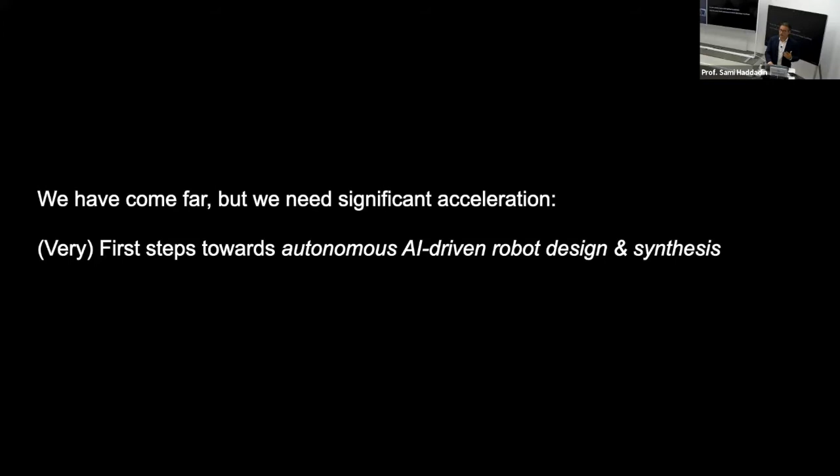All right, so I come back to the cycle I gave you in the beginning, and since I don't have so much time, I still want to go through some of the key results we have here. I want to show you some of these things can already be automated to some extent. Most of them are still today manual, but it starts to become possible that we can automate them.

All right, let's go to the manufacturer—that's actually something that is reality. Since John von Neumann and his universal constructor, the automaton he was proposing, the idea of automatic assembly of artificial systems has been there. It's been one of the main concepts of AI, you could argue, and artificial life, but never really realized, except for some nice simulations that do the game of life—but very few of them really had realism. And interestingly, these ideas have also been around, I think it's 1980, right?

Yeah, that's when I was born, actually.

Back in the 80s already, NASA people were hypothesizing about building robots for space applications. You go to Mars, bring in goods, and then the robots build the robots. That would be ideal, because then you don't have to do everything on Earth. Building infrastructure in remote locations would be fantastic, so robot construction replication could be the answer.

The inventor of the first computer, Konrad Zuse, a German, tried to do the same thing in the late 60s and early 70s, but he abandoned the idea. He was unable to do it, and I think it's very clear why: there were no machines that had a sense of touch.

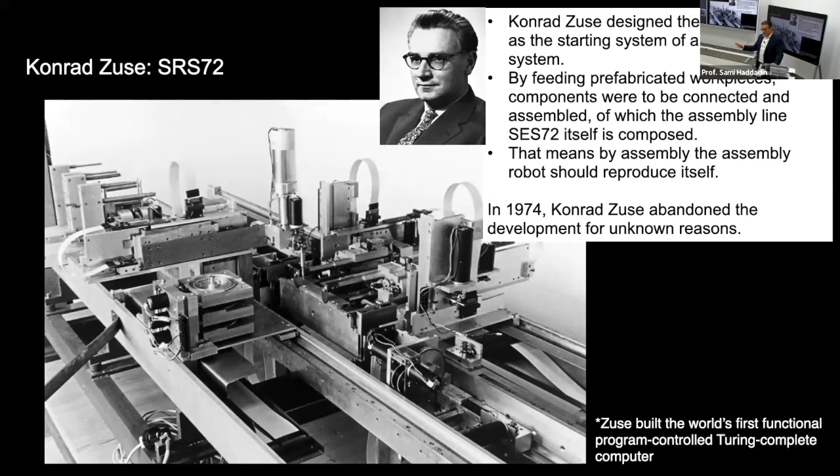If you want to do assembly, that's exactly what this is all about. You need a sense of touch. No sense of touch, no assembly. It's an absolute key ingredient. And this is also why the robots we've been developing work the way they do.

These are some examples we showed at a fair. They're actually assembling themselves, so these robots are the first robots that really manufacture themselves. It's a big factory in Germany where these robots are not made manually by hundreds and thousands of people, but actually produce themselves.

This is why we can actually produce them in Germany, and why they don't have to be produced somewhere else. So these are some impressions from the real factory.

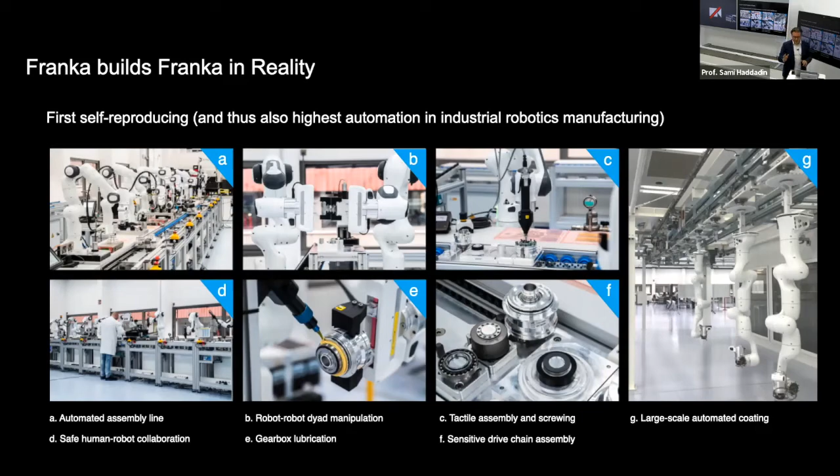Unfortunately I cannot show too much of it, but I think it's clear how this product actually works. You see hundreds of robots, but interestingly, with many humans in between—so it's humans and robots manufacturing robots. This is kind of what is possible here.

Here are some impressions of the tight interaction you see because of the sensitivity and the learning. You can really have robots that basically follow Isaac Asimov's famous first law, according to standards. In particular, you have robots that can do all the delicate assembly processes, learning from the algorithm I just showed you, able to do that in pretty fast time.

Obviously there's still lots of improvement needed until we can automatically produce something from a pure design system, but I think we have done it once, so it exists now—it's in principle possible. Okay, let's go to the design.

What can we automate there? What we're doing at the moment is: can we automatically deduce from human understanding of the hand, design processes of mechanisms in robot hands, and synthesize the design, at least on the mechanism level, such that they are able to do what humans are able to do?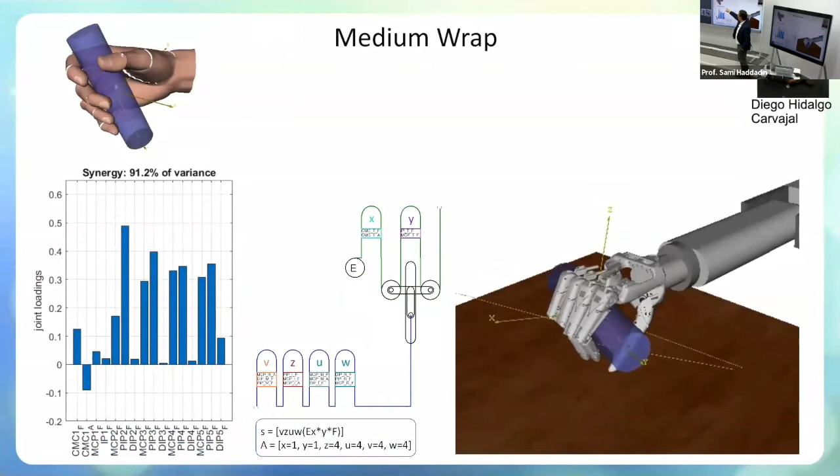It's a closed loop system. We basically use already established principal ideas of mechanics—there are hundreds and thousands of these. It's very hard to enumerate them, but can we use them to learn from what humans have been doing and recombine them to solve real-world manipulation tasks, such as grasping objects, automatically deduced from human understanding of manipulation?

This is a fully synthesized robot hand kinematics and actuation mechanism that is able to grasp all these different objects—so, from object to kinematic design.

Okay, that's now with an end-to-end approach. Similar to the learning I showed you before, we use human engineering knowledge, put it into the networks, and let the network do the rest. So that seems to be something that goes quite far.

You can actually replicate very delicate manipulation of the human with a robotic hand, at least in simulation. This has been done for various tasks and various kinematics. I think this is also to be publicized soon.

Alright, then let's go to interaction—how can we actually learn interaction? This is one of the last parts. Now that I've shown you how we can do interaction in reality, we can use this information to backdrop into simulations.

It's very hard to go from simulation to reality—it's like this typical problem. It's very hard to generalize a special case, but it's much easier to simplify a general solution. The general solution is not the simulation, it's the reality.

So if you know something in reality, then you can simulate it and then you can simplify. That's the way that in robotics turned out to be the right way. So what are we doing?

We're basically using the same algorithm we saw before, but now for hands, to go more dexterous, to inform the next generation of hand development. What kind of things can we do? It's the key into the whole example that we saw before.

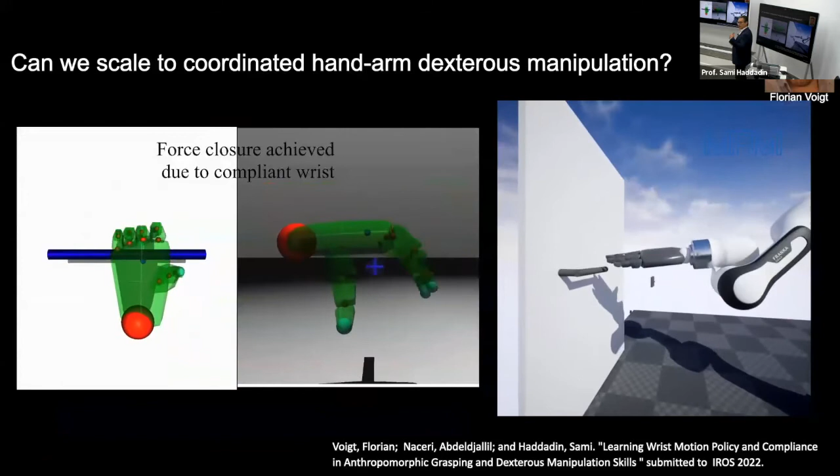This is something that now can be used to pre-train the algorithms. And the next question is, can we actually generalize that such that in reality, a robot could basically learn only in simulation and then do direct manipulation of the world?

So what we see here now is a robot that is learning in simulation, MuJoCo simulators basically, to open door handles. This takes a few minutes, as you saw before, to do the training of the policies. And then interestingly, if you transfer that, that's the real sim-to-real transfer in an instant.

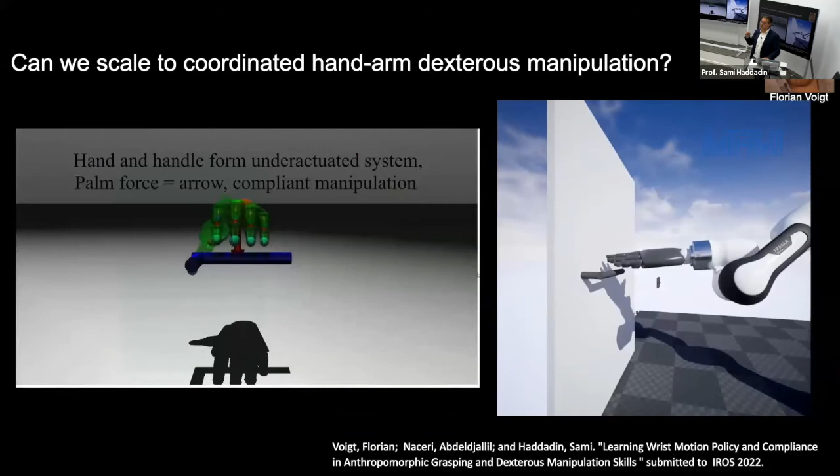So that's the robot that we use for experimental validation. That was just recently. The robot is actually automatically tuning its entire compliance, such that this very big difference you see—that was at least 10 centimeters of difference. It had no idea exactly where it is.

And just by the right compliance, like you do in a hand, you do a door handle opening, you're also able to do that—just naive, intuitively from our learning with interaction. And that was basically just out of the box from the simulator. So I think this really shows the power of AI if you combine reality with simulation and the right embodiment, to really transform these kinds of concepts into reality.

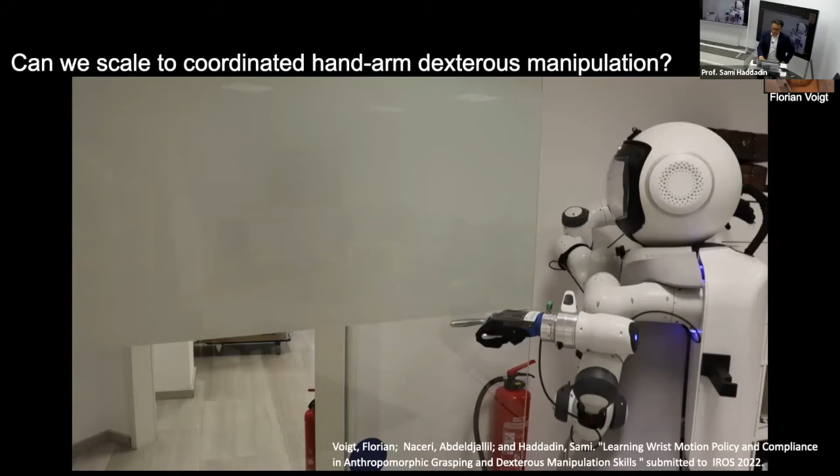All right, then let's go to the body schema. That's the last thing I want to talk about. I have to speed up, unfortunately, but that's one of the most interesting things we came across recently.

Can we basically automate body schema generation? Typically it's a very complex problem—it's highly nonlinear, topological, dynamic, kinematic. It's a mess. To be honest, 90% of robotics research, I have the feeling, was treating the body schema problem, from modeling to understanding to identification.

Basically what it boils down to is that the robot needs to learn a sensory motor graph, the topology—what's the topology of your environment, of your own body, the morphology—and then the dynamics: how heavy I am, how much force I need to actuate myself, and so on and so forth.

So what we did recently is automatically generate the topology of the system by using information-theoretic based machine learning, to essentially try to understand, from the sensory signals we get, can we get the topology of the system? Can we get the connectivity of the different robots?

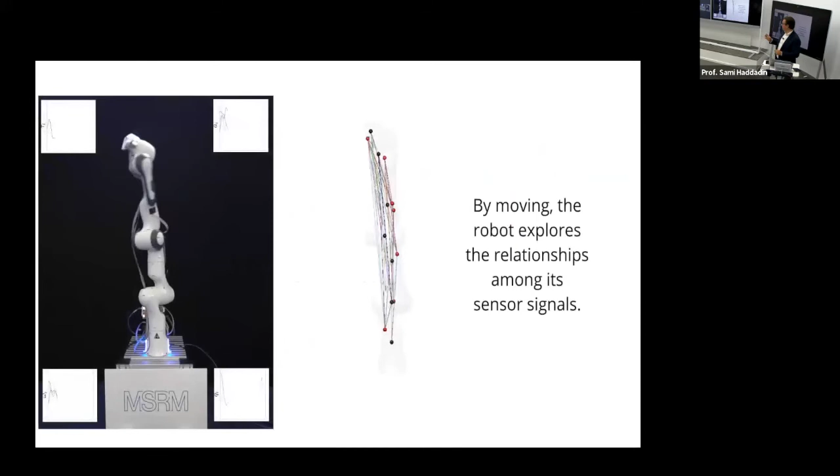So you see on the left, this is just the robot. It has no idea which part is which. It's just measuring the sensory data, and now automatically the robot is, by mutual information analysis, trying to isolate which part of my body is next located to the other one—getting the causal chains, the kinematic chains, automatically.

Obviously, if you build a robot, a mechanical engineer will tell you, why do you do it? Who cares? I gave it to you because I designed the robot. And that's not the point, obviously. The point is, can you generate this kind of embodied intelligence from scratch? And if you have modular robots, new assemblies of robots, and you want this to happen automatically for all combinations of robots in the future, then this obviously needs to be happening automatically.

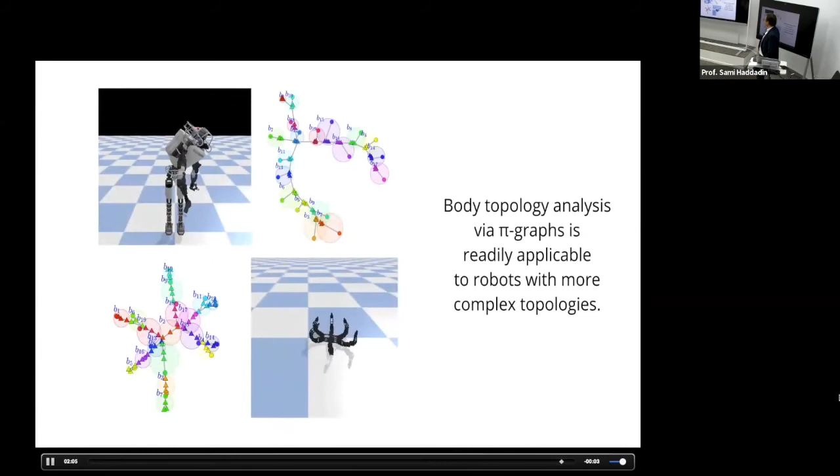So it seems to be quite something. We also tried it with others—I'll just show you some other examples in the end. So with humanoids, it's also working, with crawlers. This seems to be a method that really scales well to quite complex kinematic chains.

If you are not able to understand, at least from a sensory motor perspective, how your body works, how do you want to hold your arm? It's not working, it's not coming from nowhere, so you have to be able to do it. You can machine learn it, but for 7 degrees of freedom robots this will take 130 years just to acquire the data. A very naive and not really great idea to do it.

So we need to have a fusion of models and data acquisition. One thing we did recently is try to get inspired by two great people from robotics, Chris Atkeson and John Hollerbach. They had major papers in robotics, including how to learn dynamics, or how to system identify dynamics, and they found that this highly complex nonlinear equation I showed you can be written down as a linear parameters problem. Wonderful, so we can learn it in principle.

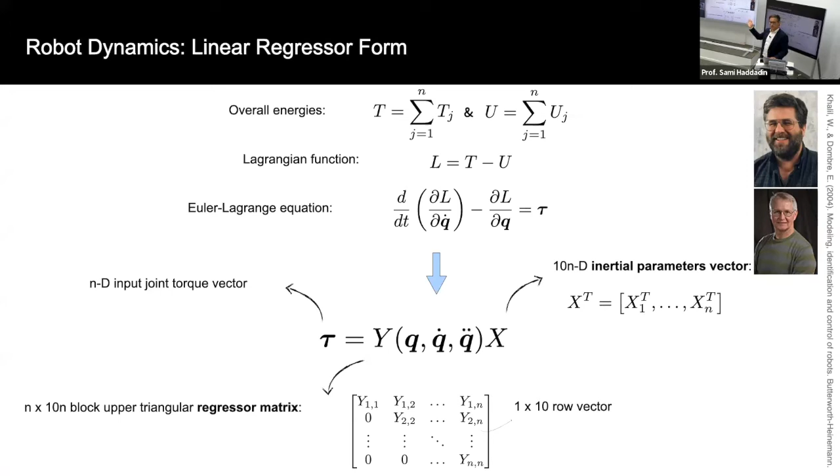System identification does the same thing: build a regressor, do the pseudo inverse, voila, it works. Well, it's a bit more complex than that, but in principle.

So what we did recently is say, okay, can we actually build a network that does the same thing? A new type of neural network, which we call first order principle network, that takes physical principles like Newton's and Euler's laws, combines it with the right acquisition of data, and then builds a network that inherently encodes physics, and is therefore able to capture nonlinear dynamics as accurately as it gets, at least from a numerical standpoint.

So basically we came up with a new representation of this type of dynamical system, not the Lagrangian dynamics or the regressor form, but a network of networks that is basically kinematic: a kinematic network and a dynamic network, sequentially — this is the last part of the phases I showed you before.

If you compare it to standard deep learning or other machine learning approaches that don't use and utilize physics, they basically don't generalize — the errors are between 50 and 100%. These equations are so nonlinear that it's not sufficient to just look at certain bunches, and you cannot just explore the whole space. The equations are not scaling well.

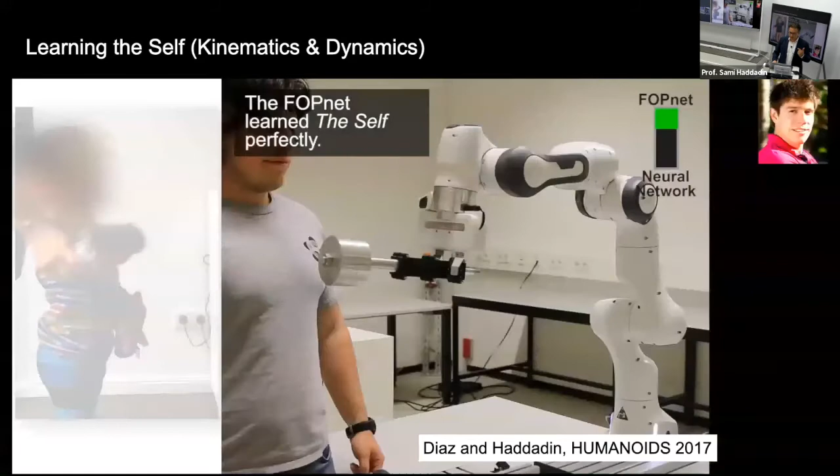So explore your own body, generate the right data, use these networks, and then what happens is the robots can now hold their own arms. This was my boy when he was three — no, two. Actually at two you have quite good body control, and these FOPnets are able to do the same thing. If you switch to standard neural networks, it collapses immediately.

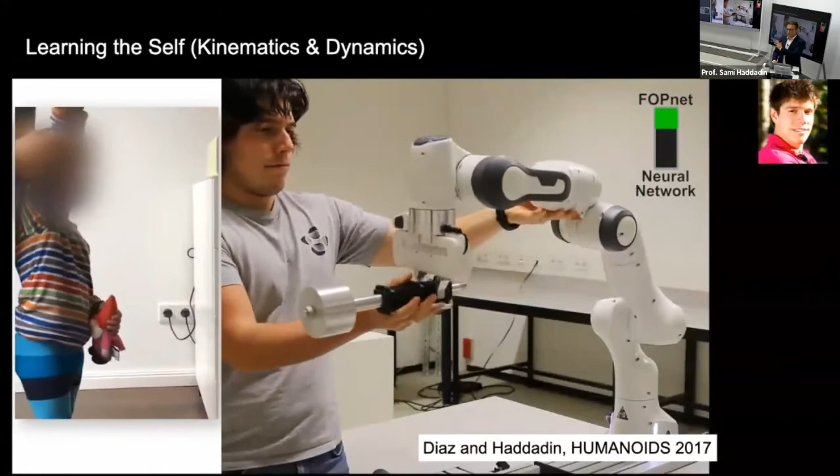So the generalization ability of pure data-driven methods just isn't scaling, and they're not working for this. This is not a functional approximation problem — functionals are more complex, and dynamics equations are not captured in pure function approximations.

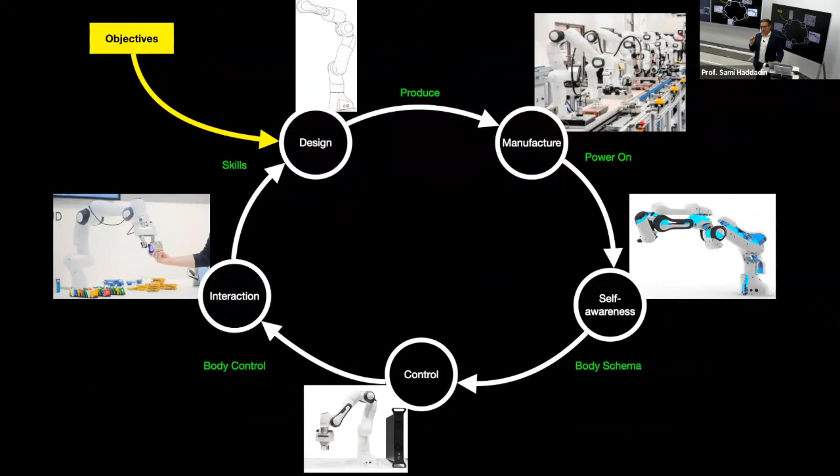I'll skip this one, just to say one last thing in order to get to that level. Let's assume that in the long term we can do that, but we have one fundamental problem. If we can automate all of that, we could hypothetically automatically synthesize a robot system based on what we want it to do. In the long term — I'm not saying it's probably more decades — but parts of it can already be automated and are used. But one thing we need is human intelligence; we need humans to inform everything we're doing here.

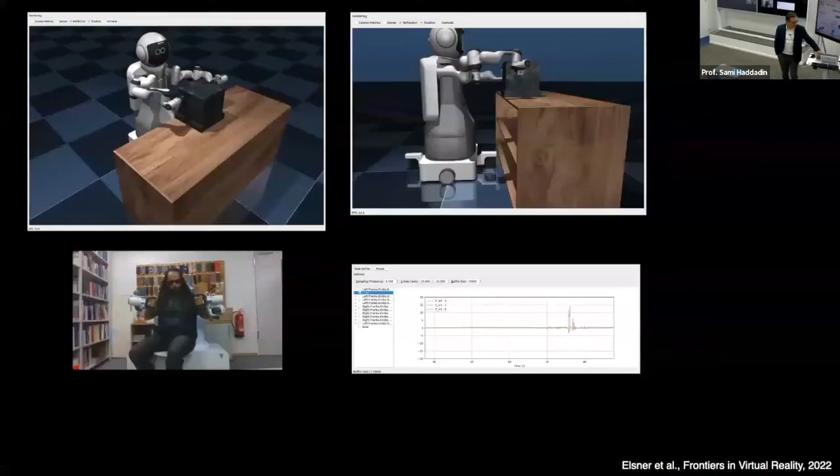I think everything we can learn, not only in the design but in the algorithms, is basically human-inspired to some extent, even just in terms of what we want to achieve in performance. If we go to interaction - physical, cognitive, all these levels - I think this is really where the human is key. Especially if you want to work in a human environment, it's the human you draw inspiration from, and understanding, to interact in that environment. So the human is the source of understanding and of learning, I would argue.

But we're still a little far from that because we're not yet able to fully deploy these kinds of systems in human environments. The data problem is still there, but I think this is about to come. Now with these breakthroughs, I think the door is open to allow that. Right now the human is more the teacher of the robot to get skills, and the robot will learn from human observation and interaction more than in its natural habitat. I think this is something that's more and more happening.

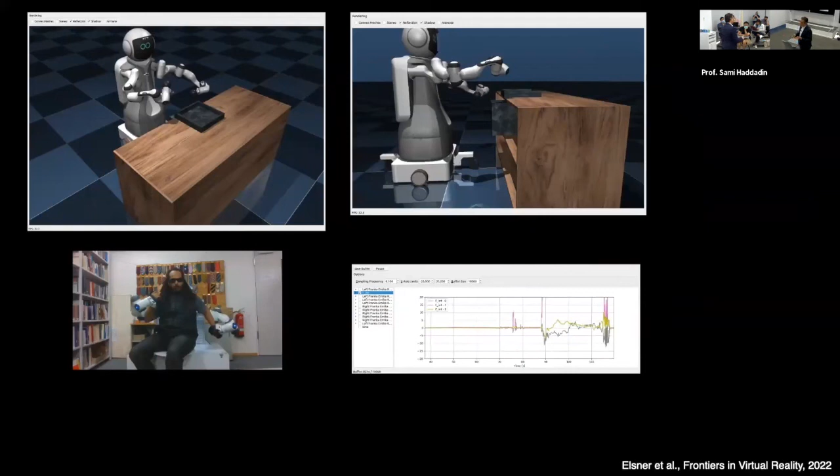For example, in a very low-level example I didn't show, in rehabilitation we do this already. A robot learns from interaction with the patient what the right assist strategy is. We actually had a collaboration with a small company in Germany that had the first FDA-approved AI in rehab - an algorithm that tries to optimize physical assistance to a post-COVID patient, or someone with a stroke, hip surgery, and so on. The interaction with the human in physical terms improves the control and assist of the robot itself.

And we did the same thing for pain detection from human patient recognition. With colleagues who are really known in that field, we closed the loop on that level too. I think this is more and more going in that direction, but you need humans and robots in one space. That's why getting the safety gear out of the way, so we can really integrate them not only in the lab but in bigger, large-scale experiments and field studies, is crucial to truly tackle that problem.

I think maybe to the first question, because I'm not sure I got the second one - it's related to that one. Speech and cognition in general, or cognitive interaction, is very important in robotics. But by the same argument I gave before, in order to truly train these systems and leverage the great advancements in deep learning at full scale, we need to create environments where we can get the amount of data to train the models to be suitable and useful. I think that's an exercise we have to do.

We can always show this anecdotally - interactions between humans and robots typically aren't an Alexa type of interaction. Humans have all these weird ways of interacting, which you know much better than I do. But repairing the interaction, all kinds of moments in the middle where it breaks and then changes the path of the course of interaction itself - it's highly dynamic. It's not just a plan and then follow, but an interaction process.

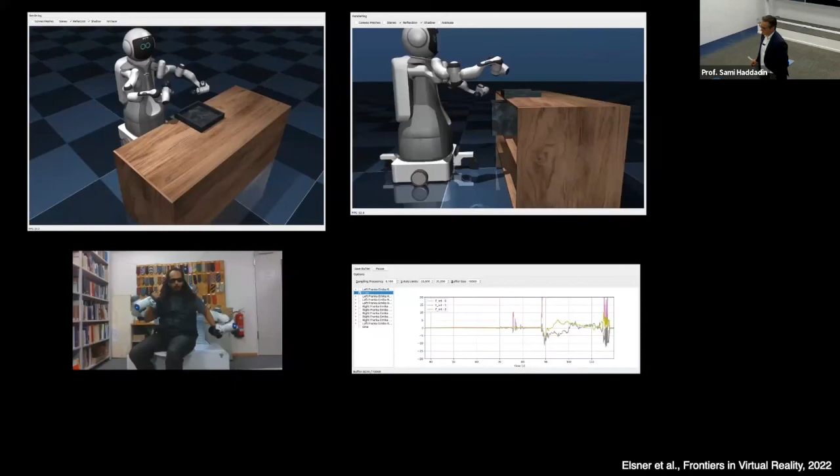And then you can take this and fine-tune it to a whole bunch of problems. The question is, do you see anything like that theoretically possible? Maybe for certain kinds of aspects, is there maybe some fundamental task that you can actually solve in this way, and this knowledge gives you a very good start. You actually need to learn something a little bit different, maybe in a more specific environment, maybe with a little bit different kind of hardware.

Yeah, it sounds like, absolutely. I think if this is possible, which I would assume, I think this would be fantastic, especially maybe not so much for industry yet, for different reasons. But if you think about all the healthcare applications, I see so many real cases there that would need that kind of interaction. So they need robots that are not only assistants, but they are interaction partners, so that they can really communicate with the person.

If you could deploy these kind of systems, for example, in spaces for the elderly, or even if you have logistics, could also be an example, right? One person is interacting with many robots, and he's there for the error recoveries and to do a natural interface. Humans like to interact also with machines naturally, so they don't want to learn a new device necessarily. I mean, they can appreciate it if it works, but I think ideally, the natural communication via speech is one of the most preferred ones.

And I think one aspect that has to be dealt with there is, at least what I've seen a lot, the perception problem on the robot side. Often the language part, the theory, the methods are there a lot, but then there are these problems. Who's talking to me? There's many people. How do I concentrate? There's all these aspects that if you bring a robot into the real environment, become very challenging. So I think if you can nail them down to some extent, there's many cases that would be very, very important.